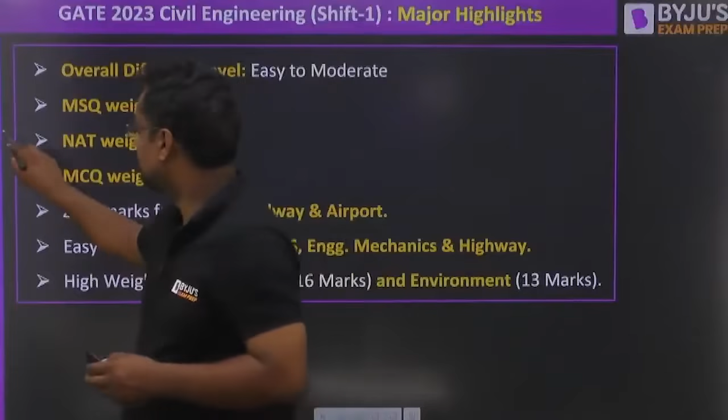If I tell you about the highlight of this GATE forenoon paper, the paper was easy to moderate level. The total number of MSQ questions were 9, NAT questions were 22 and MCQ questions were 34. There were no questions from PERT CPM, railway and airport. Even the weightage of fluid mechanics was not as high as expected, and particularly from steel, engineering mechanics and strength of material also, the questions were easy.

As usual, again the highest weightage was from geotechnical engineering with 16 marks and environmental engineering with 13 marks. If I tell you about the individual subjects: mathematics as expected was 13 marks, strength of material again 5 marks, hydrology 5 marks, engineering mechanics 2 marks, geotechnical was again the highest at 16 marks, surveying 4, building material 1, no question from PERT CPM, steel structure was 3 marks, irrigation was 1, highway engineering 6 marks, open channel flow was 5 marks, environmental 13, fluid mechanics 2.

You can see that fluid mechanics, a high weightage subject with vast syllabus, was coming at just 2 marks, and the very small topic of open channel flow was 5 marks. Aptitude was fixed at 15 marks, and concrete structures was 4 marks.

If I compare these subjects with the previous years, mathematics will of course be 13 marks. There is not a considerable difference in each subject with respect to previous years. Geotechnical was highest, and it was always highest. But if we see the fluid mechanics part, it was very less in both shifts this year, whereas in previous years it was 4 to 5 marks, but this year it was 2 and 0 in the respective shifts.

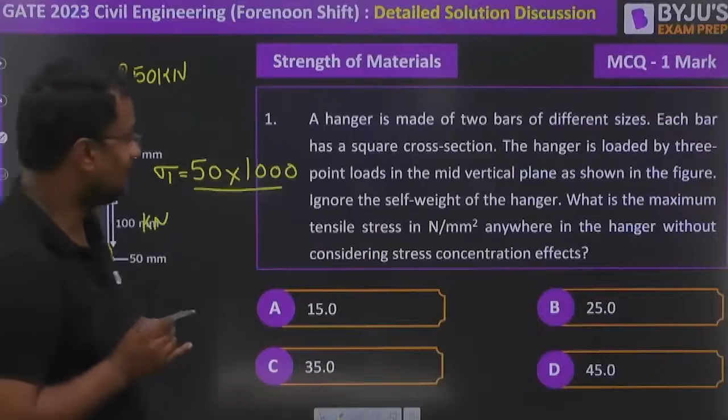First, let me find out the stress in bar 1. Sigma 1 will be the force, which here is 50 kilonewton, converted to Newton since it's asked in Newton per mm square. The cross section area: each bar has a square cross section of 50 mm, so 50 into 50. So sigma 1 will be 20 Newton per mm square.

Now let me go to bar 2. Stress in bar 2, if you see from above it is 250, from below also it will be 250 kilonewton, which in Newton is 250 into 1000, and area will be 100 into 100. If you solve this, the value you get is 25 Newton per mm square. So in bar 2 it is 25 throughout, because it is weightless and the area is the same. In bar 1, the stress throughout is 20. So the maximum is 25 Newton per mm square.

Very easy, and most of the students have done it.

And the students who will be giving the examination in future will also be able to do such questions very easily. Now, let me consider question 2.

It was an MSQ, asked for 2 marks. Although it was MSQ, it was asked in 2 marks, but I again consider this an easy level question.

Now, here the beam is given with 2 moments. These are not torques, these are moments. One moment was anti-clockwise, one moment was clockwise, and it is asked that if the support reactions are 0. If I consider this as A and B, RA and RB, this is RA and that is RB, so summation of Fy has to be 0 to be in equilibrium, so RA plus RB equals 0.

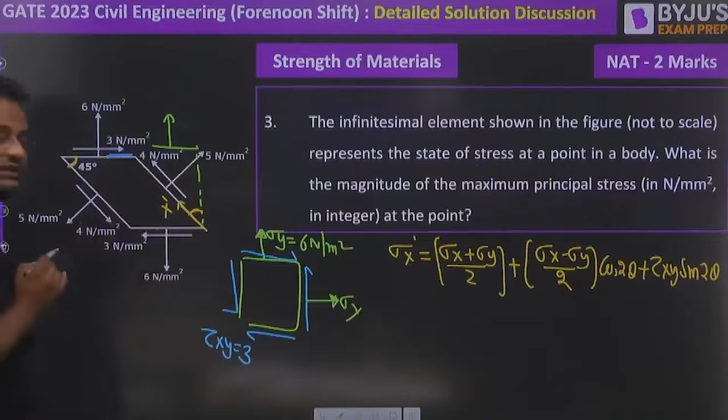Now, we all know that sigma x-dash equals sigma x plus sigma y by 2, plus sigma x minus sigma y by 2 cos 2theta, plus tau xy sin 2theta. And theta here is 45 degrees because this is 45, so these two lines are parallel, so again if these two lines are parallel and this is 45 degrees, so of course from the parallel line concept, this is again 45 degrees.

These two lines are parallel, so this is like this, this is 45, so this is 45. This angle will again be 45 degrees, and this whole angle is 180. So if you simplify this, if I draw a perpendicular from it, so this will be 45, and again by vertically opposite angle, it will be 45 anyhow, from either way you can go.

Now at 45 degrees, cos 90 will be 0. Sigma x-dash at the 45 degree plane, what is the stress? It is 5. So sigma x plus sigma y, you already know sigma y, sigma x you have to find out, sigma y is 6, by 2, cos 90 will be 0, and sin 90, sin 45 into sin 90, sin 90 is 1, and tau xy is 3.

Tau xy here you are getting as 3. Can you let me know what option you get as sigma x here? What is the sigma x you got? Please let me know, everybody, in the comment section.

So here if you multiply this by 2, so this is 10, this is sigma x plus 6 plus 6. So from here sigma x value you got as minus 2, in Newton per mm square.

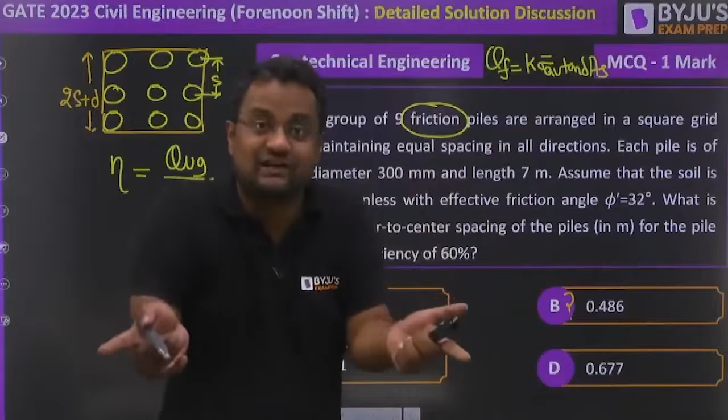So QF is given by K into sigma average into tan delta into A surface. Once students think this is the formula, the K and delta values depend on the type of material — loose sand or dense sand — but the type of material is not given here. So they think they have to use a different formula, the Converse-Labarre formula, which I'll also tell you. From both approaches, students get different answers, and moreover both options are present in the given options — that is why students are very ambiguous in this question.

Now let me tell you that efficiency is 60%, I guess, yes, 0.6. Now group capacity is K into sigma average. So at the top, the stress will be 0, at the bottom it will be gamma L, so it will be gamma L by 2.

K sigma average, tan delta into A surface. So this is a pile, and surface area, this is in 3D, na? So 2S plus D into L, 2S plus D into L, and 4 such surfaces upon N, 9 into Q of single pile.

So K sigma average will be again gamma L by 2 tan delta into A surface. What is A surface of a single pile? Pi into D into L. And eventually, the K and delta are not required because they will be cancelling out. Even the other terms also, gamma and L, other terms also.

So here, the only thing that is unknown is spacing. The unknown thing here is spacing, because diameter is also known, L is also known, and K and delta are cancelling, and from here you will be getting answer as 0.486, and IIT has given only the answer 0.486 for this particular question.

What many of the students have done for the same question, let me tell you, let me erase this. What they have done, they have used a Converse-Labarre formula, and that formula is M into n minus 1, M into n minus 1 plus n into m minus 1, by m into n. Of course, m are the number of rows and n is the number of columns. Both are 3 and 3 because there are 9 piles.

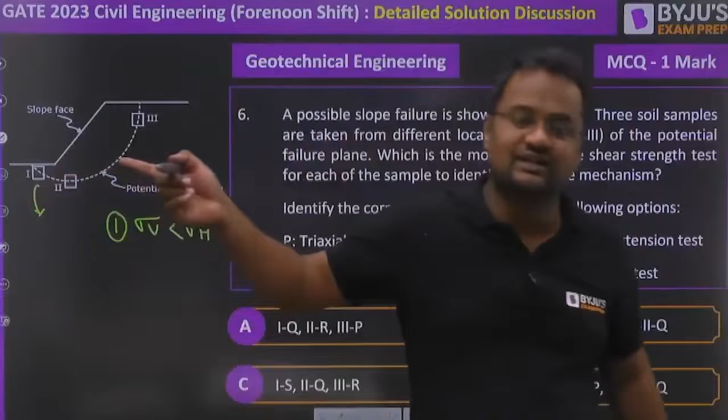Guys, for a single soil, C and phi can be different for different testing. If you take a soil from your backyard, you do the dry direct shear test, it can give different values of C and phi. If you do triaxial CD test, it can give different values. For the same soil, if you do the triaxial unconfined test, it will give different results. If you do the triaxial UU test, it will give different results. So for the same soil, it will give different results.

So that test should be done that is simulating the field conditions. Okay, so here when sigma h is more compared to sigma v, the extension test gives the actual or similar results. Here the failure plane is perpendicular to that, and in direct shear box test, the mold is like that, the failure is also like this.

So here direct shear test is better for the second. And in third, guys, when this is the failure plane, then the better test is triaxial compression test. So third it will be P. So the better option will be A. Okay, yes, but I believe that a student might not be able to solve such questions directly if he has not done this earlier.

Now let us go to question number 7. It was asked in NAT for 1 mark and everybody can do this. What is this question? In this particular question, they are asking the phi value. Drained direct shear test was conducted on sandy soil.

So we know that tau is equal to C plus sigma tan phi. As it is sandy soil, C will be 0. What is the shear stress? Under a normal stress of 50, shear stress was 35. So 35 equals 50 tan phi. One equation, one unknown, everybody can find this. From here, the phi value, I have already calculated so time is not wasted in calculations, is 35 degrees.

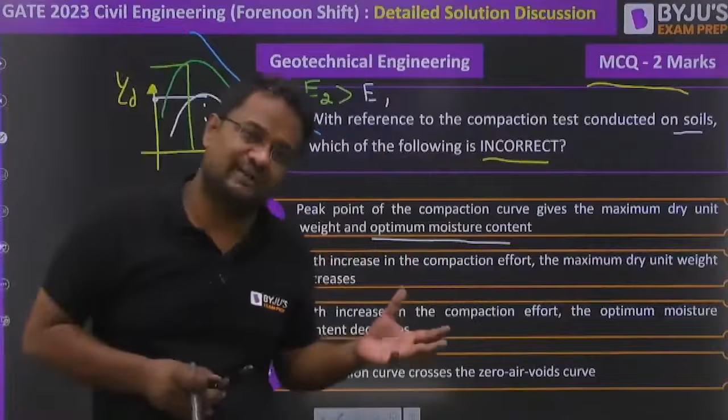Now this is the zero air void line, and practically, however much you compact, even if you are Rajanikanth or a bodybuilder, out of the millions of voids, you will not be able to make it zero air void. Practically, only theoretically do we consider zero air voids. So the compaction curve will never cross the zero air void line. So the right answer here was D.

Now let me go to question number 9. You can consider it a soil question also, but only the mathematics will be required here.

It is saying that due to a point load P at ground level, at a particular point which is Z below and R distance away, the stress due to Boussinesq, the vertical stress, is 3P by 2 pi into Z cube upon R square plus Z square, to the power 5 by 2. And they are simply asking, R is the radial distance, Z is the depth, and the variation is given like this.

Then the value of sigma Z will be maximum under what condition? So of course for any function, for maximum you will be doing d(sigma Z)/dz or dr equal to 0. They are asking what is the locus of maximum sigma Z. So you have to differentiate.

You have to differentiate to make it maximum. For it to be maximum, the derivative will be 0. Once you differentiate—I am not going into the full calculation, you can all do this—3P by 2 pi is constant, only differentiating the rest by the quotient rule, you will get the expression as 3r square equals 2z square.

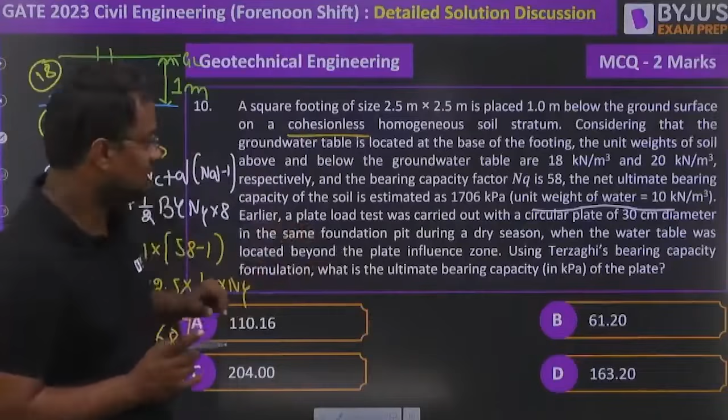So here Q and U is given as 1706. From this expression, the N gamma value you are getting as 68. Now, with this N gamma, you have to find out the ultimate bearing capacity of a plate.

Now, what is happening? A plate load test was carried out with a circular plate. The shape modification factor has to be applied accordingly. Of 30 centimeter dia, and it is same foundation. When the water table was located very below, now there is no water table, it is not in the influence zone. Using Terzaghi bearing capacity formula, what is the ultimate bearing capacity? Now it is asking QU.

So CNC, the first term will be 0. 1.3 CNC, that first term will be 0. Then it is Q into NQ. In the second term, there is no modification factor. And for the third term, it is 0.3, since it is circular. 0.3 B gamma into N gamma. I hope everybody is fine with this.

Now, QU we have to find out. Q is the load. And in the plate load test, guys, when the plate is acting here, there is no load, there is no soil above. So, second term will also be 0 here. I hope everybody is getting this.

Third term will be 0.3. B is the diameter in this case, that is B. Gamma is, this is the third term. So, this soil, and there is no water now. So, 0.3 into 0.3 into gamma into N gamma. Gamma will be 20 or 18 here in this term.

Guys, I hope you got it till here. That is 1.3 CNC, so this will be 0. Q and Q, there is no load above, no surcharge load, so it is 0.

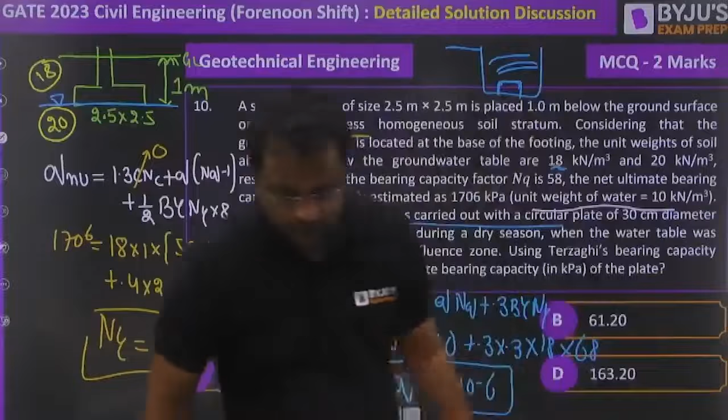From here the QU value you are getting as 110.16. That is option number A. I hope everybody got this.

Okay, now moving further, this was geotechnical, question 11. So again, guys, you have to apply the simple formula of factor of safety. And it is asked for the failure plane, so factor of safety will be 1.

As we have derived many times in the class, factor of safety is equal to C plus gamma T into Z into cos square beta into tan phi, upon gamma T Z cos beta into sin beta, and factor of safety you have to put as 1 because they want the failure. Phi is 25 and beta, C is this, inclination is 35. So this is one equation, one unknown, everybody can find this, and the value of the depth was 5.03.

Value was 5.03, and let me tell you the range given by IIT Kanpur for this question because it includes some complex terms: 4.8 to 5.2.

So easily, if you are doing it correct, you will be in the range. Okay, now 12th question, again an easy one.

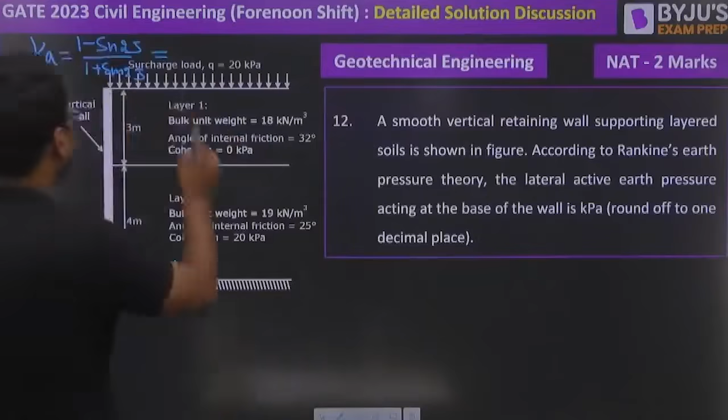Now what is the horizontal stress at the base? That is Ka into sigma V minus 2C root Ka. Since we are finding at the base, we apply Ka accordingly. So Ka is 0.406. Vertical stress here will be 20 plus 18 into 3, that is 54, plus 19 into 4, minus 2C. What is C here? C is 20, and root 0.406. I hope you can easily get this in 1 mark also.

So from here, the value you are getting, 2 into this C is how much? 40 or 20? C here is 20. So from this value, sigma horizontal you will be getting as 35.4 kilonewton per meter square.

This is a NAT type problem. Let me check the range also. So the range was 34 to 37. So it's enough. 34 to 37 is the range given by IIT. If your concepts are correct, you will always be in this range, the range given by IIT Kanpur.

Now let me go to the 13th question. Yes, now you will find some tricky question here. I expect some of you might not be able to do this. A vertical trench is excavated here.

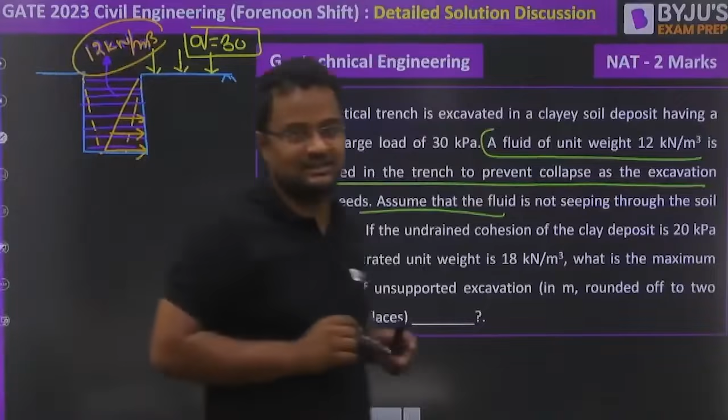How is this helping? Because now the stresses due to this are like this, more stress at the bottom, and here also more stress at the bottom, so they will be counteracting each other. From soil there is more stress here, and water is also applying stress here, so they are counteracting, and it will not be able to collapse easily now.

Now the phi value is not given. What is the maximum depth of unsupported excavation so that it is not failing? The value of saturated unit weight is 18 and the undrained cohesion value is 20. Surcharge load was 30, and the unsupported length is asked. And it is clay, yes.

So phi will be 0 and Ka will be 1. Now sigma H is equal to Ka into sigma V minus 2C root Ka as usual. Now due to the fluid, there will also be a stress in the opposite direction, so it will be plus gamma Z, that is 12 into Z, where Z I am counting from here. I hope everybody gets this expression: sigma H is equal to Ka into sigma V minus 2C root Ka, minus gamma Z, since this is also in minus.

This is also in minus. Why this minus? Because we assume this in plus direction. This horizontal stress is in plus direction, so this will be minus. So it will be minus 12 into Z. Z is the depth.

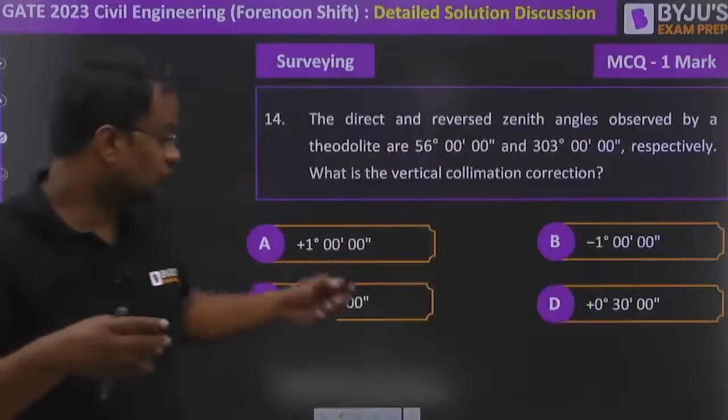Now 14th question, up to here the questions were soil mechanics. As far as soil mechanics is considered, the two fluid questions, many students might not have clicked this concept, that you have to apply minus 12z here. This might not have been clicked in the examination, and also the failure plane concept, which test was there - direct shear, extension test or compression test. Apart from that everything is smooth. That is why nobody got 100 out of 100 till now. Maybe some students will get it in the future and will be very happy.

More than 75 marks, guys, your rank is under 300 range. More than 65 marks you will be getting an IIT. More than 76, 77 marks this time, because the number of PSUs are more, you will be getting PSU also.

See, if both the angles, correction is applied 30 minutes, so this will be 56 degree 30 minutes, and this will be 303 degree 30 minutes. Now if you plus them, 303 plus 56 is 359, and 30 and 30 is 360. If you plus them, it will be 360. Then it is exactly matching with the values.

So then the value will be 360 by 2 minus the 180 value, it will be 0. So after correcting it by plus 30, making both angles 30 more, this 30 more, this 30 more, then averaging it, then it will be having no error. By doing the plus 30, adding them, dividing by 2, you will be getting 0.

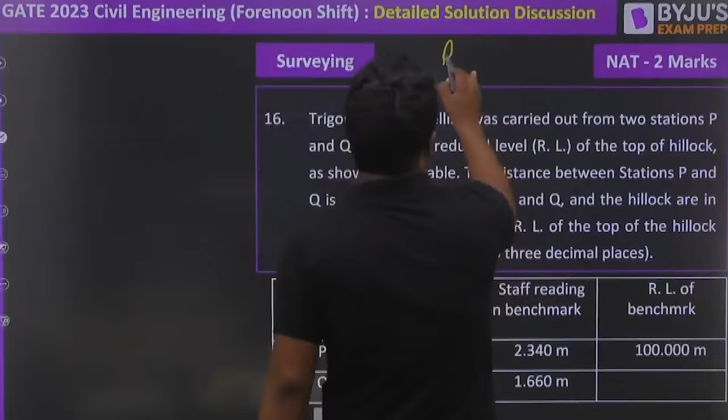Range given was 137.5 to 137.7. This was the last question, as per the master question. So what is happening here is that trigonometric leveling was stationed at P and Q to find the reduced level of the top of a hillock. This is a hillock and we have to find the top elevation.

Distance from P and Q is 55. So here is somewhere P, here is somewhere Q, and the distance between them is 55. Let this distance be D. And here was a benchmark, and benchmark elevation was 100.000. Benchmark - where is the benchmark? The distance from P and Q is this.

The trigonometric leveling was carried out at two stations P and Q, to find the reduced level of the top of a hillock as shown in the table. The distance between P and Q is 55. Stations P and Q on the hillock are in the same vertical plane. The RL of the top of the hillock has to be found out, and the benchmark - this is the staff.

From station P, the angle is 18 degree 45 minute. So this must be P here. This must be P here and this must be Q here. So from P, the angle is 18 degree 45 minute. P will be higher because the value is 2.340.

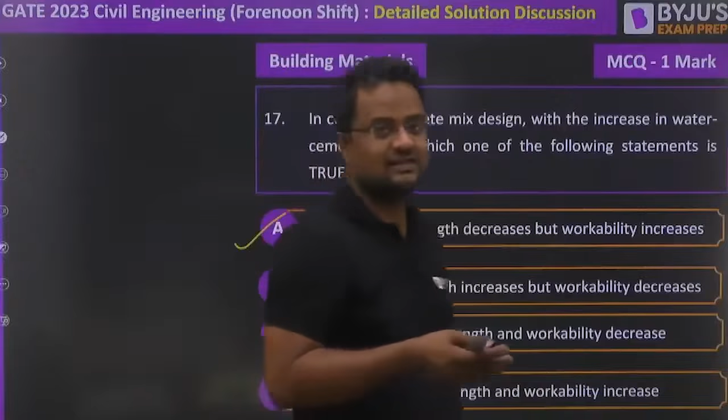Now I hand over the stage to Richa ma'am. Thank you. Hello everyone. So thank you Abhinav sir, and we'll be continuing further regarding the forenoon session analysis for my subjects.

So let's be quick. I guess you have already known the weightage part, but if you haven't, let's have a quick glance at it.

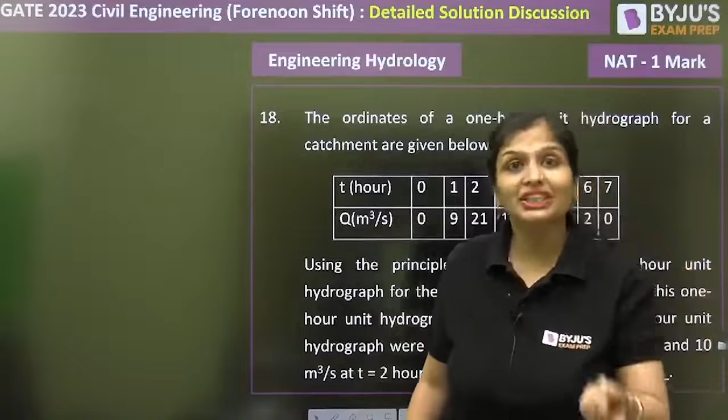So the ordinates of the D hour unit hydrograph was obtained, and it is told that you have to lag it, do it whatsoever you want, but it has told you the condition that when time will be 1 hour, the ordinate will be 3 meter cube per second, and when time will be 2 hours, the ordinate will be 10 meter cube per second. Now you do your permutation combinations, but calculate and tell us. So now we'll also try to do this.

Okay, so I'm doing it freehand now, using a blue-black color pen. Time on one side and then the ordinate. Let me go back first. Time varies from 0 to 7.

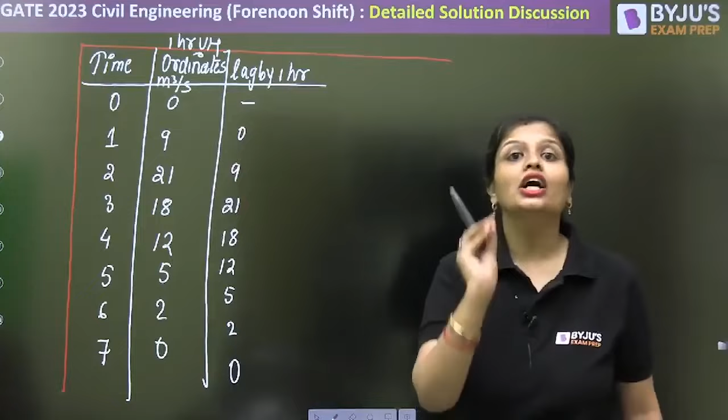Check it out at what durations it has told you - at 1 hour and 2 hour. Check whether you are getting the respective ordinates or not. If you are not, you have to lag it again. So I'll write lag by another 1 hour. So, lagged by 1 hour, then again lagged by 1 hour.

So if you add all these 3, you will be getting the 3 hour direct runoff hydrograph with n value as 3 centimeter. So you don't have to do addition for all - what is required at 1 hour and at 2 hours, do that only. So at 1 hour it will be 9 and at 2 hours it will be 30.

But in the question it is asking me D hour unit hydrograph, so instead of DRH, I want unit hydrograph. So what I'll do is 3 hour unit hydrograph will be 3 hour DRH divided by 3. So 9 divided by 3 will be 3 meter cube per second and 30 divided by 3 will be 10 meter cube per second. So I'm getting the values correct - 3 meter cube per second at 1 hour and 10 meter cube per second at 2 hours.

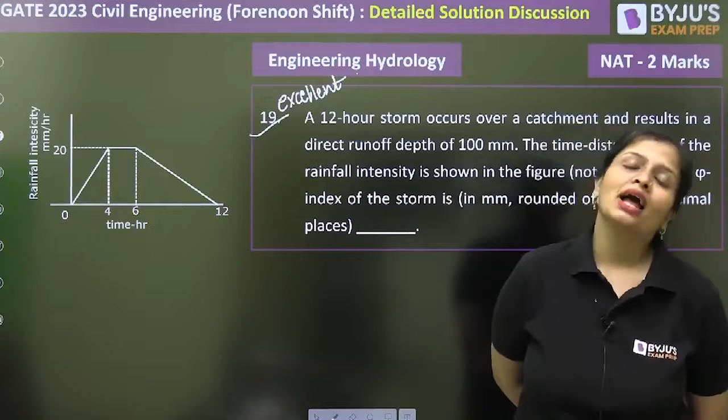Students have reported, I was confused when this paper came. Some people were saying W index was asked, some were saying phi index was asked. So I calculated just W index at that time. And you know what, in this question, phi index was asked. If phi index is asked, many students reported the value of W index as phi index only, which was wrong.

Now, obviously, whenever such questions come in the form of a flowchart and it is asking you phi index, first you have to calculate W index. That's obvious. So first we'll be calculating W index. But for calculating W index, what do you know?

W index is equal to average infiltration rate over the entire storm period. So this will be P minus R by T.

Now what is given to us? Anything given in the question? Runoff depth is given as 100 mm. Time is given as 12 hours. Precipitation you have to calculate because the graph of rainfall intensity and time is given. So we'll calculate the precipitation.

What it will be? Half sum of parallel sides. Sum of parallel sides, this is 12, and this one will be 6 minus 4, that is 2. Into distance between them is 20. So how much will it become? From here, 140 mm.

So this will become how much? 140 minus 100, that is 40 divided by 12. This will come out to be 3.33 mm per hour. So this will be somewhat here. This will be the W index.

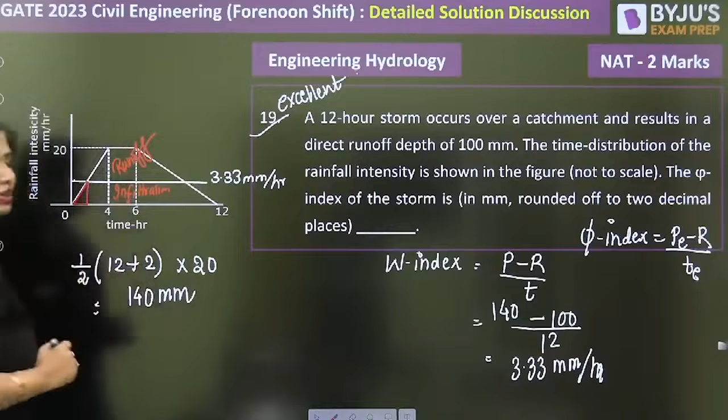Okay, this portion is taken by W index, but this portion is not taken out. I have to subtract that also. This portion is not taken out. So firstly, I have to know the time.

So we'll apply the similar triangle concept. This portion, I'll be applying similar triangle for this one: 20 by 4 is equal to 3.33, because here the value is 3.33 T1. So from here I will get T1. How much are we getting T1? This will come out to be 0.66, or you can take it as 0.67.

Similarly, I want to calculate T2, so again I will apply similar triangles here. 20 by 6 is equal to 3.33 by T2. So again, into 6 divided by 20. Correct? Anything we have done wrong or what? Just check it out: where 20, this triangle, this is the triangle, 6 is equal to 3.33 divided by T2. So just calculate.

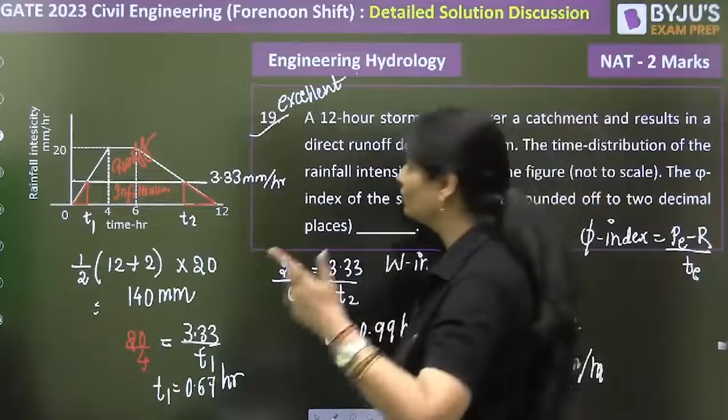P, that precipitation which produces runoff. This is the precipitation which is producing runoff. This top portion is the runoff. This is infiltration. This and this were also included in W index, but this will not be included in the case of phi index, you have to subtract it. So moving next, we have to calculate PE, that precipitation. Total precipitation was how much? 140 mm. So you have to subtract these two.

Half base into height. Base is 0.67 into 3.33. And again this one is how much? Half, you will be getting how much? 0.99. Okay, but in this case, will you be taking 0.99 only?

Tell me, that is again a question. Will you be taking 0.9? Tell me fast, by the time I'll do the calculation with my virtual calculator mobile. Will you be taking 0.99 only? Of course. Why? Why will you be taking 0.99? Because this whole portion is 0.99. I'm telling you all the mistakes.

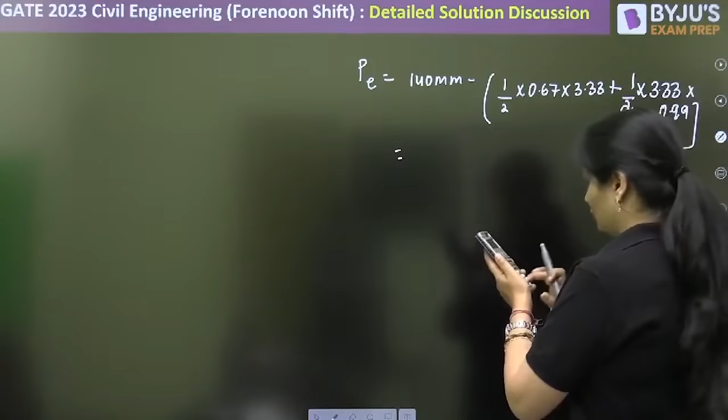Clear? So let's solve it. 140 minus, here it will be half into 0.67 into 3.33, half into 3.33 into 0.99. Okay, so it will come out to be 137.2361. This will be the precipitation.

So now apply the phi index. Phi index is that precipitation which produces runoff. So this is 137.2361 minus, what was the runoff? It was 100 mm. Now let me check it out again.

So that to avoid 100 mm, and the duration of rainfall excess is 12 hours. So in 12 hours you have to subtract how much? 0.67 hour and 0.99. So this will give you the phi index in mm per hour. That's it. So let's solve this. Minus 100. Okay, so this will come out to be 3.6 mm per hour, 3.6011 it is coming, so this will be the answer.

Good question. Since I was explaining, it is taking time, but otherwise this question is very simple. Okay, so come on, now moving to the next question without wasting time.

Oh, this question was damn easy. Simple formula based question, nothing you have to do. What is given to you? In Horton's equation fitted to the infiltration data, what is given to you? Initial infiltration capacity, which is always more, is given to you as 10 mm per hour. So initial, F naught is given to you as 10 mm per hour, or you can write it as Fi, whatsoever denotation you take, that's up to you.

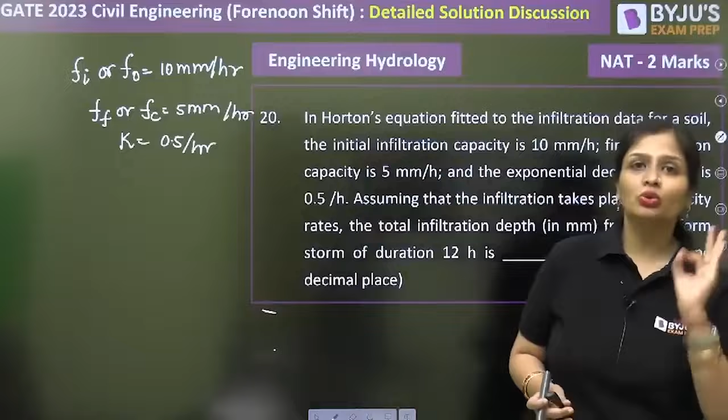And final infiltration rate is 5 mm per hour. So final, that is FF, or you can take it as FC, is 5 mm per hour, and exponential decay constant K is given to you as 0.5 per hour. Just check it out, this is important. Sometimes they write it in per minute, per day, so you have to have a check on it. Now, assuming that infiltration takes place at capacity rates, you know that you can apply Horton's equation only in the case where intensity of rainfall is greater than or equal to infiltration capacity. The total infiltration depth for a duration of 12 hours will be.

So since it is asking you cumulative, what you have to do? You have to integrate. So in one line, we'll do it, integral from 0 to 12 of FC plus F naught minus FC e to the power minus KT. So what is FC? FC is how much? This is 5. 10 minus 5 is 5, e to the power minus 0.5t.

So this will be 5. Integration of dt will be t, from 0 to 12, plus 5, from 0 to 12. So that's it. 5 into 12 minus 0, come on, 12 fives will become 60. 12 fives are 60. We have to calculate this: 5 divided by minus 0.5, e to the power minus 0.5 into 12.

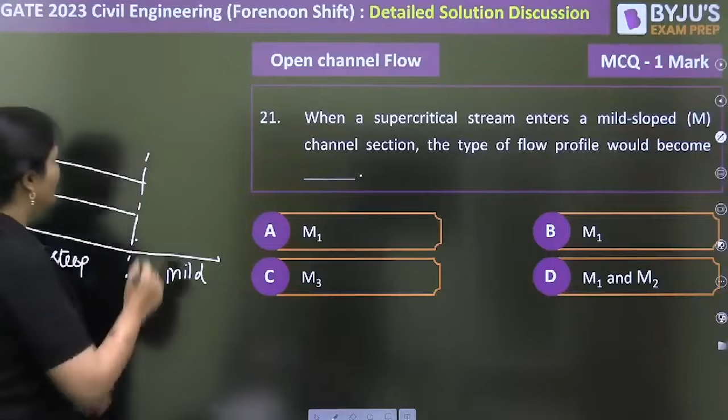Instead of this, you can have a sluice gate also. So you can see the water flows, and here it will form an M3 flow profile. And after that, well in advance, it forms a hydraulic jump as well. So that's the condition, because here hydraulic jump is not given to you. But when it goes from the steep slope, from the S3 flow profile, and it goes towards mild slope channel, you know that initially there is a small rapidly varied flow condition, and then you get M3 flow profile. So M3 will be the correct answer.

Okay, next question. This question, I won't do the calculations. This is purely based on logic, and within 2 minutes at max you will get the answer. How? I'll tell you. These are given just like a trap so that you have to do calculations which is not at all required. How come? Let's check it out.

Now, while making the flow profile, the first rule which is told to you is: lesser the slope, more will be the normal depth, and vice versa. So if the slope is less, depth will be more. And you can check it out by yourself, common sense. If this is the slope, more depth will be there. If I increase the slope, lesser depth will be there above it.

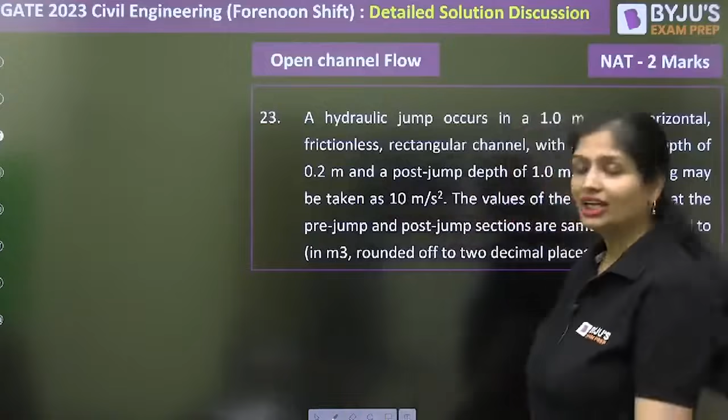1 meter wide horizontal frictionless rectangular channel. Whenever this phrase, horizontal frictionless rectangular channel, is given, that means you can apply Bélanger's momentum equation. So this is given to you.

Pre-jump depth, that is supercritical depth, is given as 0.2 meter, and post-jump depth is given as 1 meter. G value is given as 10 meter per second square. It is told that the value of specific force at pre-jump and post-jump sections are same, so calculate the specific force, denoted by F. Since this is an NAT question, make sure you take the value of G as 10 meter per second square only.

Now for calculating F, what is specific force? You can write it as A Z bar plus Q square by GA, where Z bar is the centroid from the free surface. For a rectangular channel section, first I have to know the discharge. Width is given, depth is given, everything is given except the discharge.

So for calculating discharge, you should know Bélanger's momentum equation. From that we got a result involving Y1 and Y2, Y1 plus Y2. Everything is given to me: 0.2 into 1.

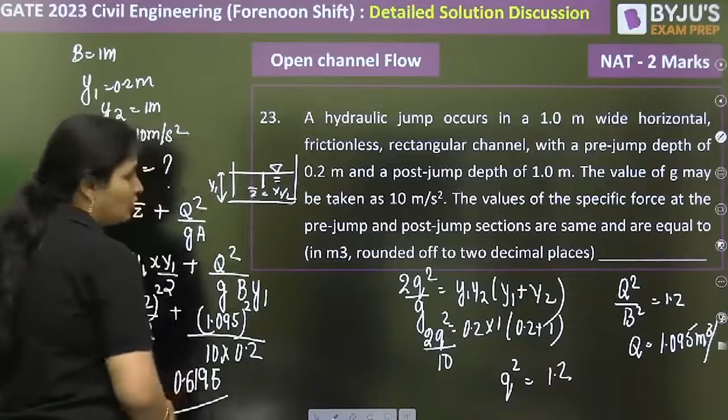0.2 square by 2 plus Q square, which is 1.095 square, G is 10, width is again 1, this is 0.2. Come on, calculate: 0.2 square divided by 2 plus 1.095 square over 10 into 0.2. How much will it be coming? It will be coming 0.6195. This will be the specific force. You can round it off up to 2 decimal places, so you can take it as 0.62. This will be the answer. Okay, simple question, just calculations are there.

So now what happens? The greenhouse gases which are there, the solar wavelength which is coming, greenhouse gases are present, trapped in the atmosphere. So now what will happen, what will greenhouse gas do? The solar radiation which is there, I'll draw the sun also, so don't laugh, I draw it like this only ever since my childhood.

So what will happen? These solar radiations are there, so greenhouse gases which are dispersed in the atmosphere, what will it do? It will allow the solar radiation. So everywhere you will see it allows, it doesn't absorb, it allows firstly. So it allows the solar radiations, but the wavelength is short. If you talk about the size, the wavelength is short, so short wavelength solar radiation is there. The greenhouse gas will allow the short wavelength to pass through the atmosphere.

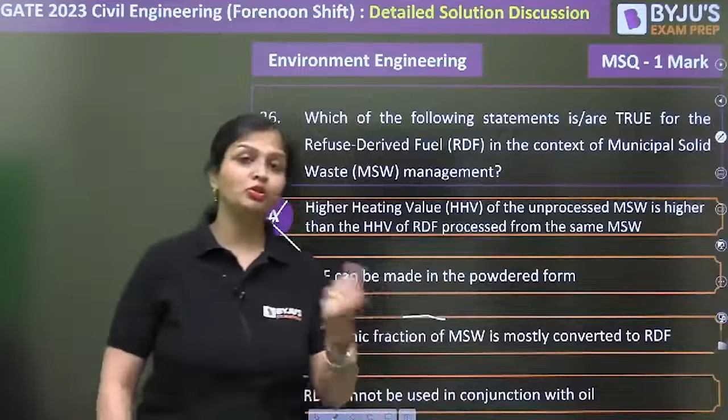RDF cannot be used in conjunction with oil - this is something where there's slight ambiguity. In some research papers they say it can be used in conjunction with oil, and somewhere it is said that it cannot be used. The reason it's said it cannot be used could be that oil is there specifically during the rainy season - the refuse and oil mixture can be there, so there are chances they can be used. So the word 'cannot' is incorrect here, it can be used. So B will be the answer for this. Okay, next coming further.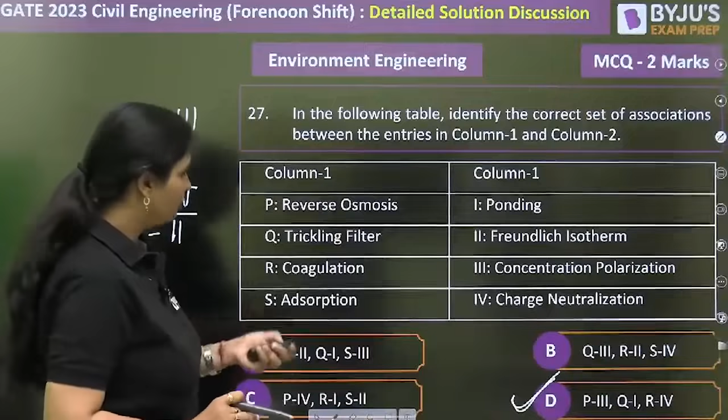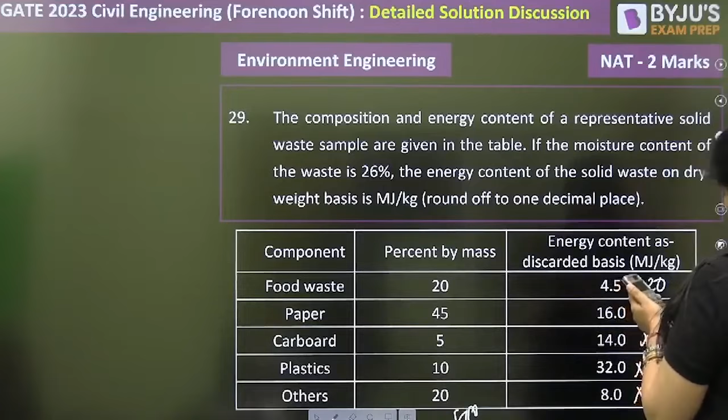I have to calculate the energy content on dry basis. So if for 1 kg, 4.5 is the energy content, for 20 kg how much will it be? I'm doing it this way: 4.5 into 20... 45, 5, 10, 20. So I'll calculate it. Total value comes out to be 1360 megajoules.

Now it is asking me the energy content on dry weight basis. So the total energy is 1360 divided by (100 minus moisture content). Moisture content is 26%, that's it. So let us solve it: 1360 divided by (100 minus 26). So this will come out to be... 18.37 megajoules per kg.

Clear? So this was the simple question which can be asked, we have dealt with these questions. Now coming further to the next question - this was flocculator, a very basic question, trust me.

A flocculator tank has a volume given in the question. Temperature of the tank is 15 degrees Celsius, velocity gradient given is 100 per second. Temperature of the water in the flocculator chamber is reduced from 15 degrees Celsius to 5 degrees Celsius, and all other operating conditions, power input, everything maintained is same.

So now the decrease in the average velocity gradient, meaning G - initially, let us suppose when it was 15 degrees Celsius, the velocity gradient was G1. Now if the temperature is reduced to 5 degrees Celsius, velocity gradient is G2. How much reduction has taken place? That's what it's asking. Dynamic viscosity is given to you, meaning mu is given to you, and you have to tell the percentage decrease.

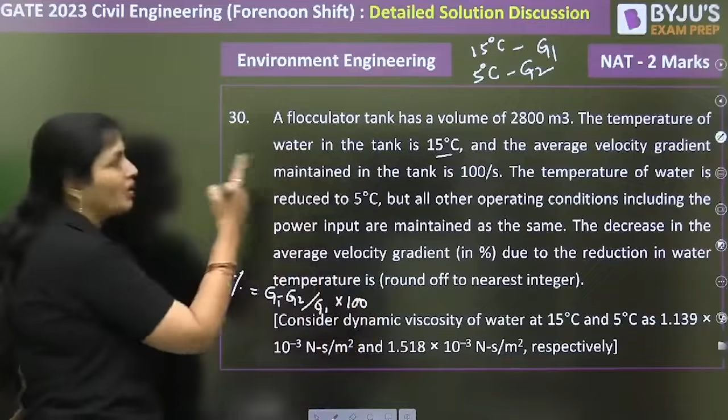So firstly, G1 I already know. For getting the percentage decrease, it will be G1 minus G2 divided by G1 into 100. So G1 I already know, I have to calculate G2. Firstly, I know that power is same, so P is equal to G square mu V. So power - we have to calculate. G is given to you as how much? 100.

100 square. Viscosity is inversely dependent upon temperature. Dynamic viscosity at 15 degrees Celsius is given to me as 1.139 into 10 raised to power minus 3. And volume is given to me as how much? Volume is 2800.

So let's calculate this: 100 squared into 1.139 into 10 raised to power minus 3, into 2800. So 31892 watt is the power, and power remains the same. So again applying the same formula for calculating.

This was G1, now I have to calculate G2. 31892, temporal velocity gradient I have to calculate. Viscosity is given as 1.518 into 10 raised to power minus 3. Volume is again the same, that is 2800. So from here we will calculate G2.

How much will it come? 31892 divided by... raised to power minus 3. 86.62 seconds. Initially it was how much? 100 second inverse, now it is 86.62. So percentage decrease will be 100 minus 86.62 divided by 100. 13.38% is the percentage decrease.

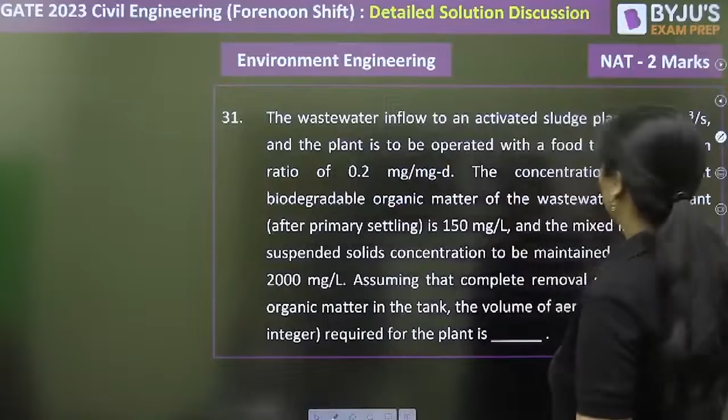So what you can see, wastewater inflow is given to us as 0.5 meter cube per second. Food to microorganisms ratio is given as 0.2. Now in the question it has given influent BOD, S0 value is given as 150 mg per liter, and mixed liquor volatile suspended solids, that is X value, is given as 2000 mg per liter.

Complete removal is taking place, so it is asking us the volume of aeration tank. Simple, F by M, food by microorganisms. Food is organic matter, microorganisms you report in terms of suspended solids, V into X. Q is 0.5. Just check it out, here the unit is in day. I always say write the units corresponding to it, you will never make a mistake.

So 0.5, S0 is 150, so this is meter cube per second, and here it is mg per liter. Volume is coming, that we have to calculate in meter cube, and X is 2000 mg per liter. So calculate the volume from here. This will be 0.2, and this we have to convert into seconds.

So this will be 0.2 divided by 86400, so this will come out to be 2.3148 into 10 raised to power minus 6, if I am converting it into second inverse, food to microorganisms ratio. So into 2000.

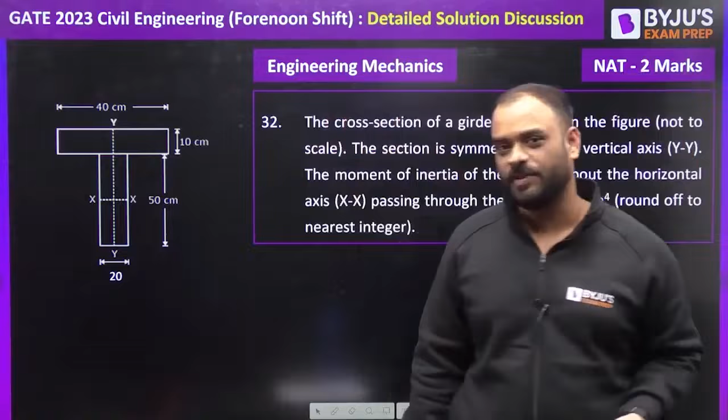Okay, so let's understand this particular problem which is based upon the moment of inertia. No doubt this question is very simple but little bit calculative one. So let's understand how we can solve this. Okay, so what is given to us? The cross section of a girder.

Now the cross section of a girder is shown in the figure, not to scale. The section is symmetric about a vertical axis YY. The moment of inertia of the section about the horizontal axis XX passing through the centroid is in centimeter raised to power 4, which we have to find.

That means we need to find out the moment of inertia about XX, about this particular axis. So first we will try to find out the centroid of this section from the bottom. Let us consider this as the y bar value. Now let's calculate the area.

This is basically area 1 and this one is area 2. Area 1 is equal to 20 into 50, that is equal to 1000 centimeter square. Then we have area 2 which is equal to 10 into 40, which is equal to 400 centimeter square.

Now guys, what should be the location of the centroid of these areas from the bottom? Let's find it out. Let us suppose the centroid of this particular area is at this location, and at this particular location for area 2.

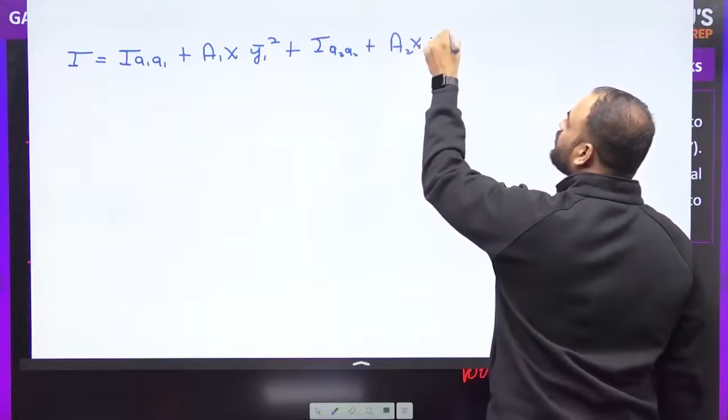So A1 into y1 bar square plus I A2 plus A2 into y2 bar square, right? So y2 bar square. Okay, let's calculate this particular value.

How much area did we have? What will A1 be? This will be 20 into 50 cube divided by 12, right? Let me show you that figure first. So this is 20, this is 50, BD cube by 12, okay? BD cube by 12 plus area 20 into 50 multiplied by this distance y1 bar.

So y1 bar is equal to how much? This particular distance is y bar minus y1, which will be y1 bar, right? That means we need to subtract 25 from 33.57, right?

33.57 minus 25 square, then plus moment of inertia about A2. So how much is it? It will be 40 into 10 cube divided by 12 plus 40 into 10 into, again the distance of the centroid from the bottom for area 2, which is 55, right? So 55 minus y bar.

Wait a second guys, let me check once again. Yes, wait a minute. This is basically 55 and this one is y bar, right? So you will get this particular distance, right? 55 minus y bar value. Okay, you can calculate it.

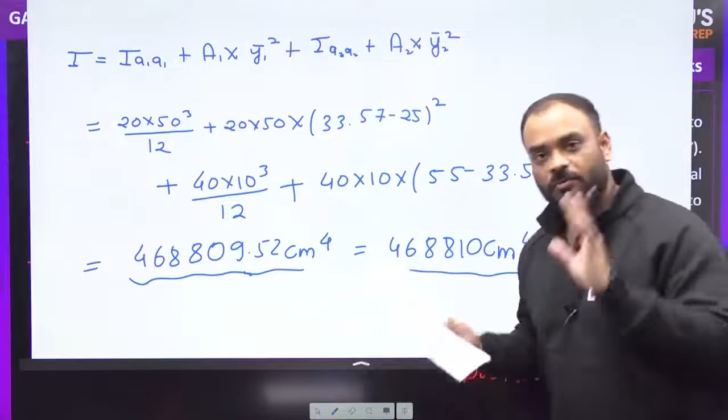Now I think all of you are able to understand it is a very simple question, which is based upon engineering mechanics. Let's move to the next question, which was asked in your examination.

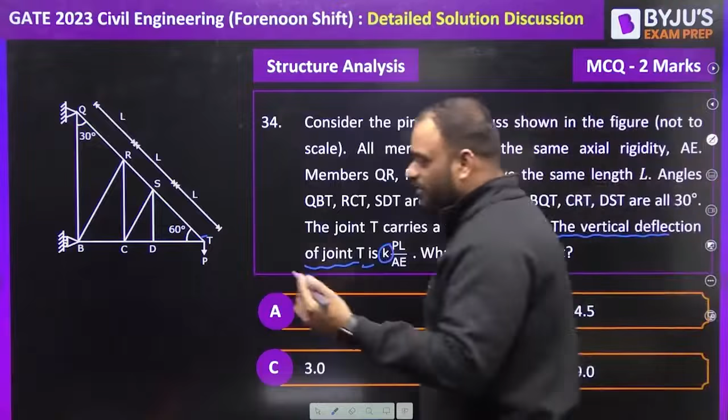So first of all, it is very basic. You know, guys, we can remove some of the members because these members will have zero force. Let me remove it. So this one is zero force member, this one is zero force member, this one is zero force member, and this one is also zero force member. You know the properties right? When 3 members meet at a particular joint, 2 are collinear, 1 is non-collinear, make it 0 like this. Now we have a simplified truss.

Let's draw it on the next page and then we will try to find out the answer. So let me draw the figure, guys.

So this is our simplified truss in which at this particular point we have P and this is our point T. Then we have a roller over here, so due to that reason we will have a horizontal reaction which is basically HB. And at this location we have HQ, and this one is VQ. This length is 3L, and this angle is already given to us.

Let's see if it is given or not. Yes, it is 60 degrees. So guys, if it is 60 degrees, then we can write down the length of BT. The length of BT is equal to how much? This is HB. The length of BT is 3L cos 60 and the vertical length will be 3L sin 60. This will become correct, right?

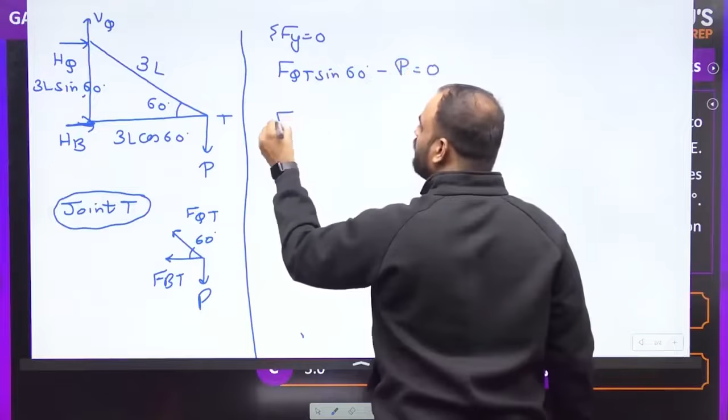So summation Fy is equal to 0, that means FQT sin 60 minus P is equal to 0. So FQT multiply by root 3 by 2 is equal to P. So the value of FQT is equal to 2P by root 3. So this is the value which we are getting for FQT.

Please remember this. Now next we have to find out the FBT value. How we can do it? By considering summation Fx is equal to 0. That means minus FBT minus FQT cos 60 degree is equal to 0. So let's write down FBT value. FBT is equal to how much? It is minus of FQT cos 60.

So FQT is equal to 2P by root 3, multiply by cos 60. Cos 60 is 1 by 2. Kindly cancel this, you will get minus P by root 3 as a value.

Okay, now the next member which we need to find out is the BQ member. So let us consider joint B. So guys, at joint B we have this particular member, which is a vertical member, and this vertical member is BQ, so FBQ, and we have one horizontal reaction, but the value of this reaction we don't know. So this is basically HB, and then we have FBT.

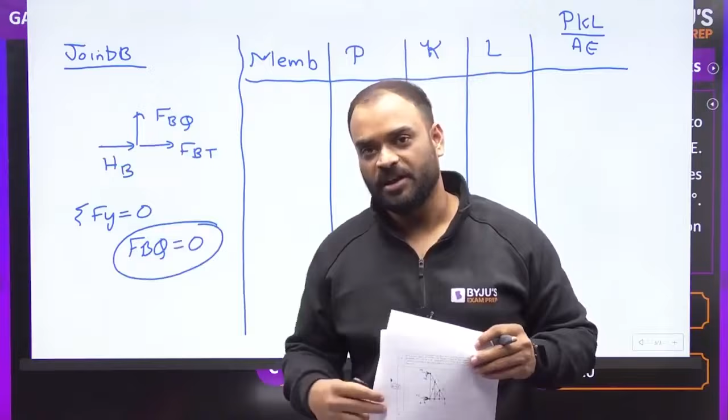That means by P force, these are the forces in the member. If we apply a unit load, then how much the forces will be there in the various members, that we have to apply. So what are the members we have? BT, BQ and TQ. Now guys, what is the force in member BT?

Let's see. In member BT, how much is the force? BT is minus P by root 3. What about BQ? BQ is 0. What about TQ? TQ is equal to 2P by root 3.

Now guys, due to P force, these are the values. If you have a unit load, then how much are the forces? Just divide all the values by P. So it will be, without changing the sign, minus 1 by root 3, 0, and plus 2 by root 3.

Now what are the lengths of various members like BT, BQ and TQ? Let's see. So the length of this particular member QT is equal to 3L.

What about BQ? BQ is equal to 3L sin 60. 3L sin 60 means 3L into root 3 by 2.

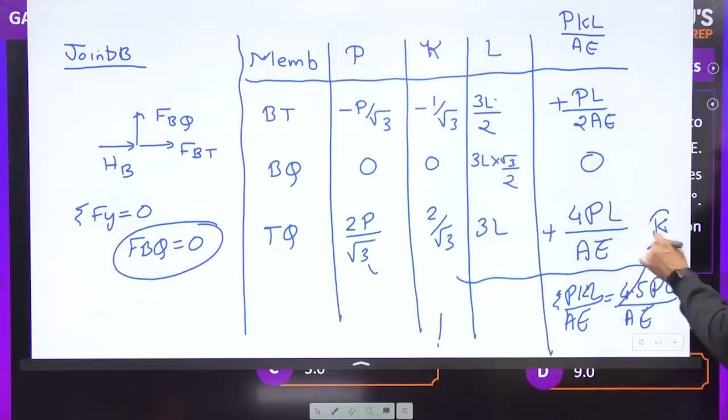So if you add both the values, how much you are getting exactly? Summation PKL upon AE is equal to how much? It is equal to 4.5 PL upon AE. So this is the value which we are getting, and this is nothing but our K value, and our answer is 4.5. Let's see if we have any option or not. So guys, B is the correct answer for this particular problem. I hope you have understood this very well, right?

Now let's move to the next question, guys. The next question is based upon the truss part again. We just need to find out the force in one of the members, and it is a very easy question. Let's do it quickly.

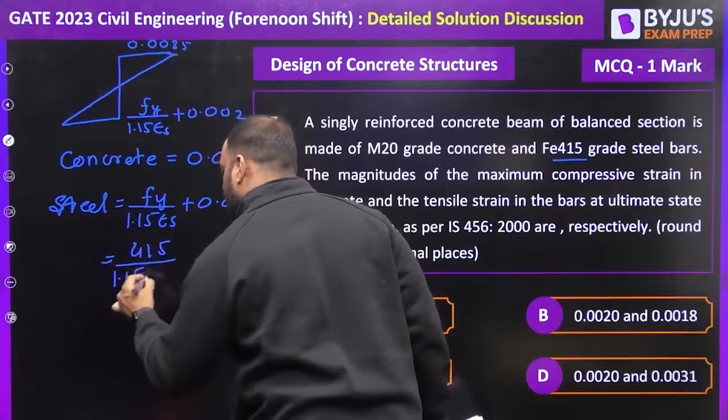So the value of Fy is equal to 415. Let's write down 415 divided by 1.15 multiplied by 2 into 10 raised to power 5, plus 0.002. If you solve this, how much are you getting exactly? Please do the calculation, I think it comes around 3.8 something - 3.80435 into 10 raised to power minus 3. So that means A is the correct answer for this particular problem. I hope it is clear to all of you.

Let's move to the next question, and it is a little bit difficult question, asked in the GATE examination. But if you have some logic or your fundamentals are very strong, then only such type of problem you can solve in the examination, otherwise it will become very difficult to solve such type of question in the exam. So what is given to us? Consider a doubly reinforced RCC beam with the option of using either FE250 as a plain bar or FE500 as a deformed bar in the compression zone. Now the modulus of elasticity of the steel is given. As per IS 456-2000, which type of bar can have the stress in the compression steel reach the design strength, which is 0.87 Fy, at the limit state of collapse.

Now, first we need to understand what is the permissible strain in case of mild steel and what is the permissible strain in case of HYSD bar, like Fe500 we have, and what should be the strain when the bar is in compression. So to understand this, we need to draw the cross section of a doubly reinforced beam. Let us consider these are the compression reinforcement and these are tension reinforcement, and let us consider this is our neutral axis. Let us consider the effective cover for compression reinforcement is DC, and let us consider this depth is XU, which is the actual depth of neutral axis.

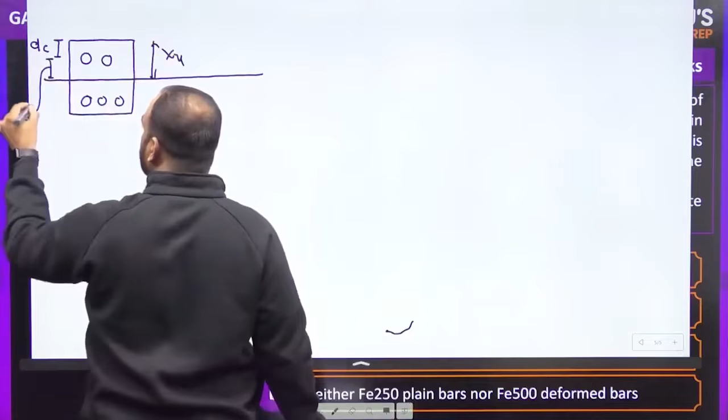So can we mark this particular distance? This distance will become XU minus DC. Now let me show you the strain diagram which we mostly use in our design or analysis. The maximum permissible strain is 0.0035, and the strain at the level of compression steel which can be achieved over here is ESC - we need to find the value of ESC. It is very easy: we can write 0.0035 multiplied by XU minus DC, divided by XU, and this is equal to the strain in the compression steel. This is the exact formula. But you know that the steel is very close to the top fiber, so for our assumption, we will consider the maximum strain achieved by the compression reinforcement is very close to 0.0035.

This is our limit, right? Maximum strain which can come in the compression reinforcement is 0.0035.

Now what we will do, guys, listen very carefully. The permissible strain for Fe250 is stress upon strain value. The permissible stress is 0.87 Fy divided by ES.

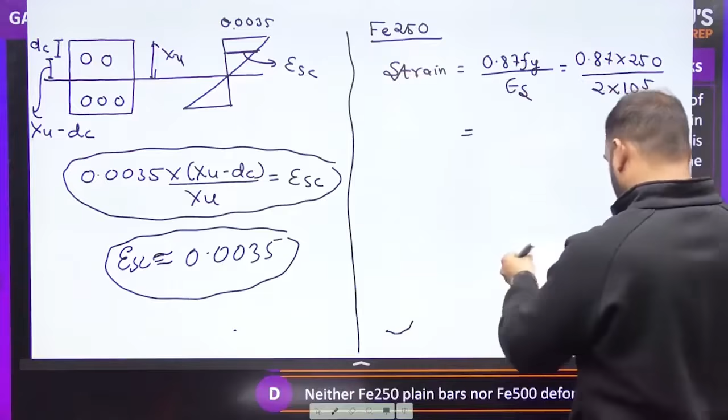So what are the values? We have 0.87 into 250 divided by 2 into 10 raised to power 5. If you calculate this, you will get the permissible strain in case of mild steel bar at which the stress will achieve 0.87 Fy. Let me write it down. This particular strain which we are getting is 1.0875 multiplied by 10 raised to power minus 3. At this particular value of strain, the stress which is basically FSC will achieve 0.87 Fy value.

But you need to think over here. This is the permissible strain for mild steel. But in compression reinforcement, the strain which is basically 0.0035 can be achieved, or it can be there in this particular reinforcement part. But you know, guys, the maximum permissible value of strain in Fe250 is 1.08 something, and this one is 3.5 into 10 raised to power minus 3.

So tell me, guys, which strain is greater? This is greater and this is smaller. So can I say that this particular strain is higher and this strain is lower? So definitely at a lower strain value, we have already achieved the failure stress, or the maximum permissible stress, which is equal to 0.87 Fy. That means Fe250 will achieve FSC equal to 0.87 Fy before achieving this particular strain value. And that's why this particular steel can fail earlier.

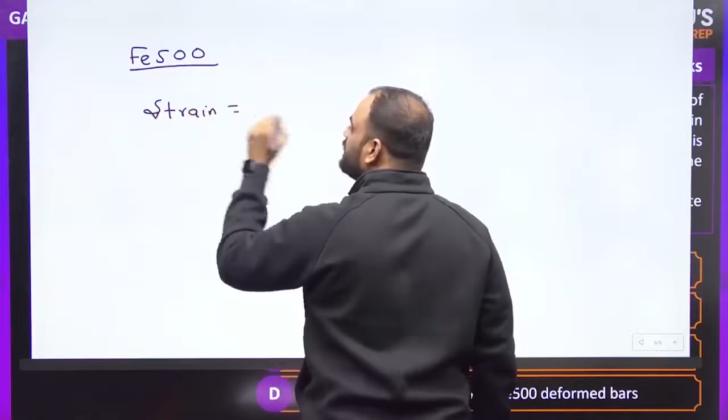But what about Fe500? Let's understand Fe500 also. For Fe500, the permissible strain is equal to 0.87 Fy divided by Es plus 0.002. So 0.87 Fy means 500 divided by Es, 2 into 10 raised to power 5, plus 0.002. If you solve this, it is coming around 4.175 multiplied by 10 raised to power minus 3. If our steel will achieve this particular strain, then only it will achieve FSC equal to 0.87 Fy.

But you know, guys, the maximum strain which can be there in the compression reinforcement is 3.5 into 10 raised to power minus 3, which is less than this particular value. So 3.5 into 10 raised to power minus 3 is lesser than the maximum permissible strain in Fe500. So that's why it will not achieve the 0.87 Fy value in case of Fe500.

Now tell me which is the correct statement. Fe250 plain bar only. Yes, Fe250 bar will achieve 0.87 Fy value at the time of failure or at the time of collapse. Fe500 no. Both no, neither no. Only the answer is A. A is the correct answer for this particular problem. Clear?

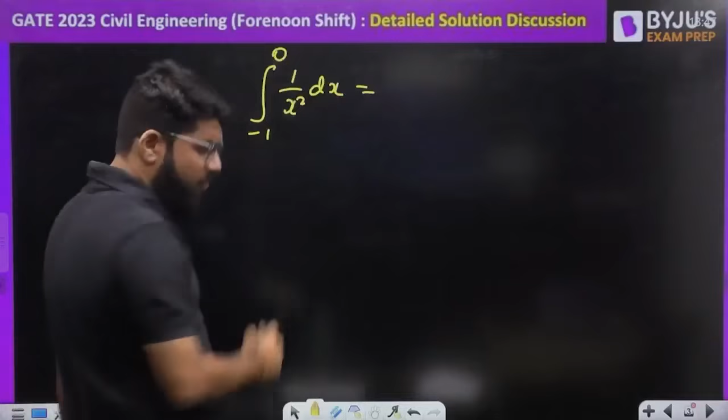So if I take any one of them, suppose I take I1, that is the integral from minus 1 to 0 of 1 upon x square dx, and the integral of 1 upon x square becomes minus 1 by x, with lower limit minus 1 and upper limit 0. Solving with the limits, 1 by 0 will be infinity, minus 1 upon minus 1, that becomes plus 1, and that is unbounded, that is divergent. It tends to infinity or minus infinity, meaning it has diverged.

And if any one of the integrals diverges, the answer will diverge. So the integral does not converge. Let me tell you, many students make a mistake here - they start directly solving the integral and get the answer as somewhere minus 2, which is wrong. So you need to take care with improper integrals - this is the improper integral of the second kind.

Moving ahead to the next question: the probability of occurrence of two independent events A and B, a very fundamental question, are 0.5 and 0.8 respectively. What is the probability of occurrence of at least one of A or B? That is known as A union B - at least one event occurring is the probability of A union B. A very fundamental question, simple even for 1 mark, because we know the formula is P(A) plus P(B) minus P(A intersection B).

Where is the intersection given? What is given is there are two independent events, and whenever there are two independent events, P(A intersection B) is P(A) times P(B). So from here you take up this data. Let me write down the answer now. P(A) is 0.5, P(B) is 0.8, and minus their multiplication, that is 0.5 into 0.8, which is 0.4. So the total answer comes out to be 0.9.

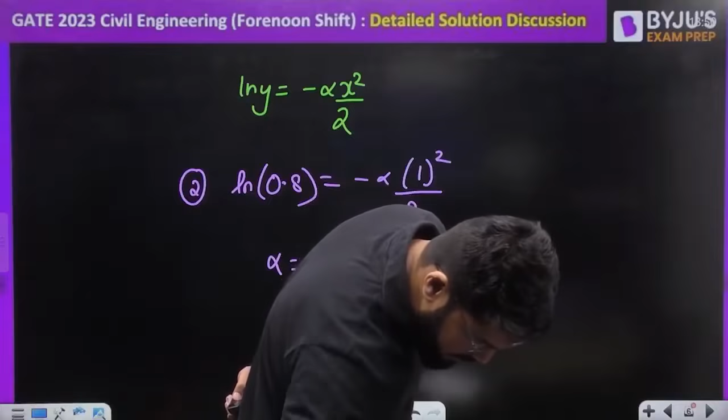Perfect, 0.446 is the answer turning up. Okay, so a very simple NAT, 1 mark question.

Moving ahead to the next question, number 42, a Fourier series MSQ question, but on very fundamentals. This is very fundamental. Looks like a big question.

The following function is defined over the interval minus L to L, that is px^4 plus qx^5. So the interval, the time period you have to take is minus L to L, and then it is expressed as the Fourier series given to you, with sine terms, cosine terms, and the constant term, also known as the DC term. Which option among the following are true?

So an depends on p, an depends on q. So actually you have to find out an and bn depend on what. Let's have a look into it.

Now when I want to solve for an, look, this is sine pi by L x. That means omega is pi by L, or I can say that time period is 2L. Time period is 2 pi by omega, and that you can judge from here as well. The function is defined for the given interval minus L to L.

Now, an is the coefficient of sines. An is equal to what? Coefficient of sine. And what is the formula? The formula is 2 upon T integral over one time period of f(x) sine n omega x dx. Clear? That should be the formula.

So now let us substitute. This an is then equal to 2 upon 2L integral for one time period, taking minus L to L as one time period. f(x) is px^4 plus qx^5 multiplied by sine n omega x, and omega is pi by L, so sine n pi x by L, dx.

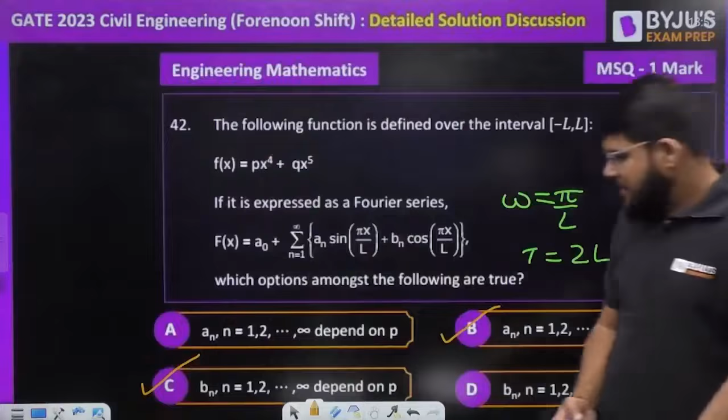So this integral will be zero, and Bn is going to be left depending on P. Bn will depend on P. So that's option number B and option number C. The correct answer is option number B as well as option number C.

Moving ahead to the next question, number 43. If M is an arbitrary real n cross n matrix, then which of the following matrices will have non-negative eigenvalues? Let us have a clear discussion on this, because questions based on the combination of matrices are very important every year.

Now how do you actually find the eigenvalues of, say, M square or M transpose, etc.? Let's do a small discussion. Suppose M has the eigenvalue lambda and eigenvector x. So we say Mx equal to lambda x. We say x is an eigenvector if it satisfies Mx equal to lambda x. Now what about M square?

What about M square? I multiply M on both sides. So M into Mx becomes M into lambda x. This is known as M square x, and lambda is a scalar number you can take outside, leaving Mx. But Mx is lambda x. So M square x is known as lambda square x. So what are the eigenvalues of M square?

So if M has the eigenvalue lambda, M square has the eigenvalue lambda square. Now M is a real matrix, but its eigenvalue lambda square may be positive or negative, because lambda may be imaginary as well. Looking at lambda square, it seems it may be positive only, but it may actually be positive or negative. For example, if lambda is plus or minus i, then lambda square will be minus 1, so it can be negative too. So will it always have non-negative eigenvalues? We directly can't say that.

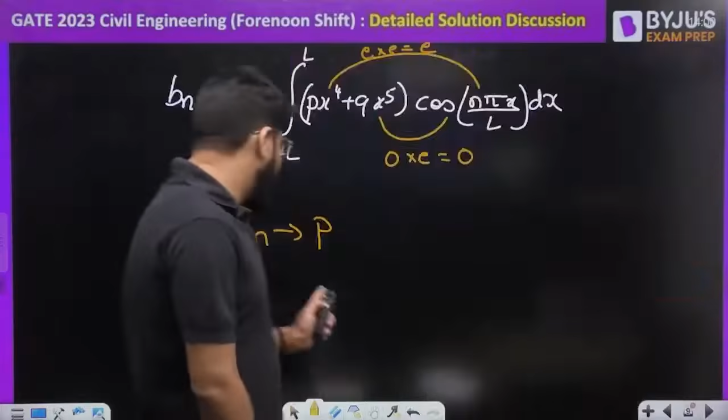So M transpose will have eigenvalue lambda, but M transpose squared will have lambda square, which may be positive or negative. So for option A or D, we can't surely comment, meaning it is not the answer.

Which of the following will always have non-negative eigenvalue? M M transpose and M transpose M. M transpose M is always symmetric.

Number one method, you can solve this using the concept of definite matrix, semi-definite matrix. Or there's one more way of solving this question. If I want to talk about option B or C, let's talk about M transpose. Let M be equal to, I'll give you a very simple solution.

Let M equal A, B, C, D. So what is the product M transpose M? It becomes A, B, C, D multiplied by the transpose of A, B, C, D. When you take the product, it becomes A square plus B square; then first row second column, AC plus BD; then again AC plus BD; and lastly C square plus D square. That is M transpose M.

Now what are the eigenvalues of M transpose M? If I calculate the trace, the sum of eigenvalues lambda 1 plus lambda 2 equals the trace, which is A square plus B square plus C square plus D square, sum of squares, always positive. Then the product of eigenvalues equals the determinant, and when you solve for the determinant, it is A square plus B square multiplied by C square plus D square, minus the cross term AC plus BD whole square.

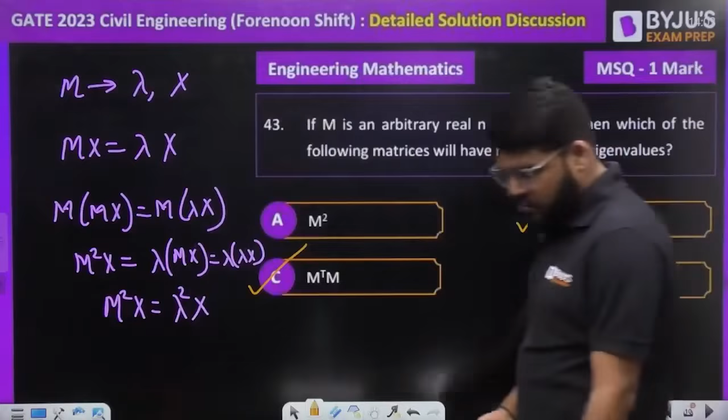Now see, eigenvalues of A transpose are the same as the eigenvalues of A, as I just proved. But are the eigenvectors the same? No, we've also proven that eigenvectors of A transpose will not be the same as the eigenvectors of A. Then for eigenvalues of A inverse and eigenvectors like M square, let's prove this too. So, AX equals lambda X, right? Multiply both sides by A inverse.

A inverse into A got cancelled, so X is equal to lambda, A inverse into X. Lambda to be divided on other side. So what is A inverse X? It is 1 by lambda X. Now in AX equal to lambda X, X is the eigenvector, lambda is the eigenvalue. Similarly, A inverse X is 1 by lambda X.

So eigenvector remains to be X, but eigenvalue is 1 by lambda. That means if A has the eigenvalue lambda and X, A inverse has the eigenvalue 1 by lambda, but with the same eigenvector. That means the eigenvalues of A inverse are the reciprocals of eigenvalues of A, and option D, eigenvectors of A inverse are same as eigenvectors of A. Correct. The correct answer for this MSQ question is A, B, D.

See, this matrix is just given as a dummy matrix. You might think that first I should calculate A inverse and A transpose, but I'll be wasting a lot of time. No, don't have to waste so much time here. Moving ahead to the next question.

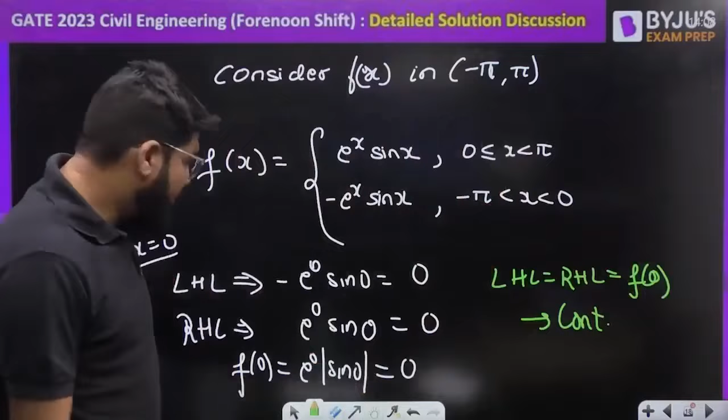Now, what is the left hand derivative? I am checking at x equal to 0. Left hand derivative means when x is slightly less than 0: minus e power 0 cos 0 minus e power 0 sin 0, and since cos 0 is 1 and sin 0 is 0, this equals minus 1. Now the right hand derivative for x greater than 0: e power 0 cos 0 plus e power 0 sin 0, which equals plus 1. Since left hand derivative does not equal right hand derivative, the function cannot be differentiable.

As I taught earlier, at any point if a function is continuous but the left hand derivative is not equal to the right hand derivative, then such a function is said to have a sharp point, a break point, or a corner point at that value of x.

So moving ahead to the next question, number 46: a function fx that is smooth and convex shaped, one of the very simple questions for 2 marks.

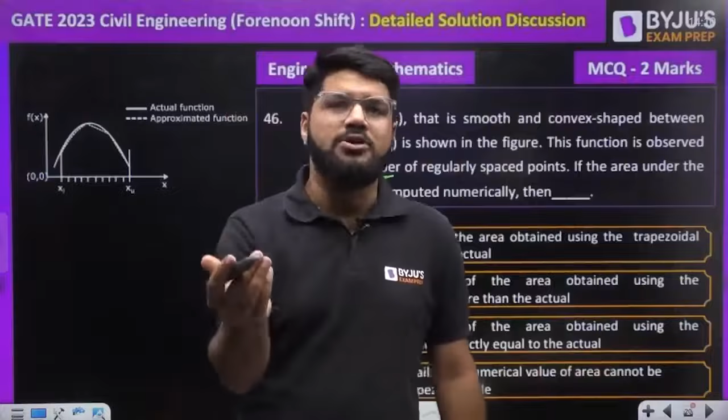So for odd number of points, what do we do? Let me take this smooth and convex shape and mark 3 points: point number 1, point number 2, point number 3. This is my XL lower limit, this is my XU, and this is my middle point XM.

Even if you take any odd number of points, the logical question is how do you find the numerical area? By the trapezoidal rule - by joining every end point and creating a trapezoid. This is one trapezoid, this is the next trapezoid. So the total area by the trapezoidal rule is the sum of all the areas of the trapezoids obtained, and from the area of trapezoid formula only, you get the final formula of the trapezoidal rule.

Graphically it is clear that this area is slightly less than the actual area - this part has gone missing. That is why the total area will be less than the actual area. The correct answer is A - nothing more to derive here. It's a simple observation: because it's a convex shaped graph, the total area computed is less. The correct answer is A.

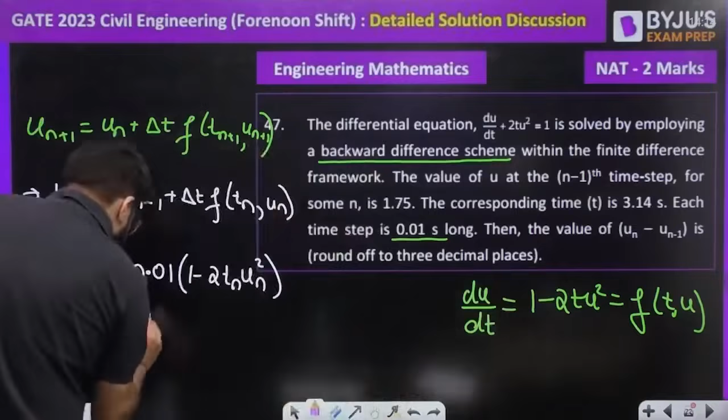Now you are given un-1 and tn-1. Let me write the value separately: un-1 is equal to 1.75. At what time? At tn-1, the corresponding time is 3.14.

So what is going to be the next time tn? That is 3.14 plus the step size, 0.01, so the value of the time is 3.15 seconds. At that time, I will calculate un, and then I have to find un minus un-1.

We cannot directly extract this from here, because un will still be a variable. So let us first find un.

So what is this un? That is un-1, which is 1.75, plus 0.01 into 1 minus 2tn times un squared, where tn is 3.15. tn is 3.15 and un is the unknown we need to figure out.

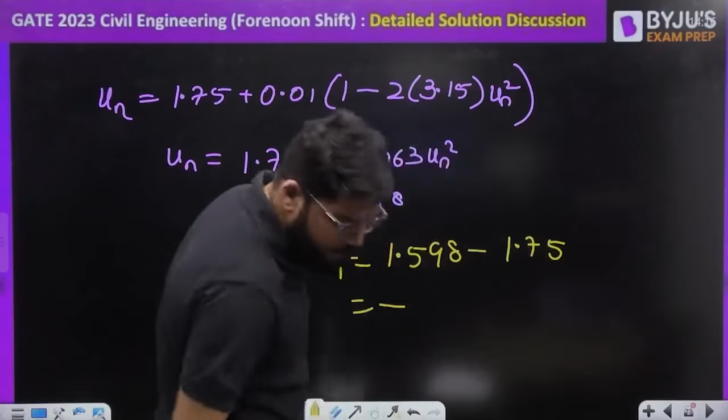Right, now let us calculate un minus un-1. That is 1.598 minus 1.75, which is going to be something negative. Quickly subtracting: 1.598 minus 1.75, and the answer is minus 0.152. That is the answer.

All right, moving ahead to the next question. So the previous one was the last question of mathematics. Now we have the questions of aptitude and verbal, I'll just tell you the answer key. Let us discuss the quant and logical reasoning question: I have not decided what I will do this evening, I might visit a friend.

Next, 49: Eject is to insert as advance is to retreat. By word meanings, you have to solve this. Next, let us come to this question.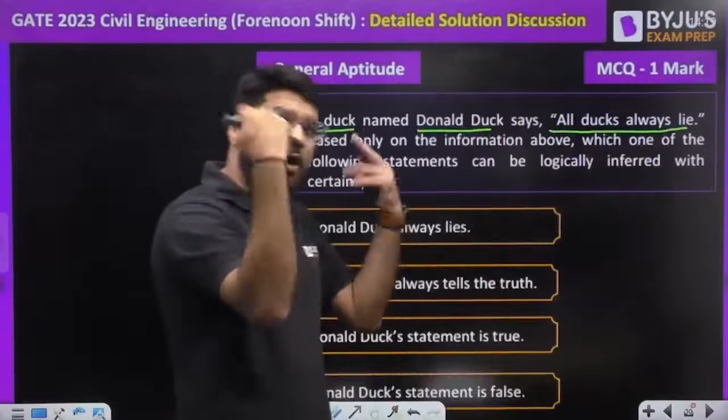Next question, a very simple logical reasoning, interesting question. A duck named Donald Duck says, all ducks always lie. Now, based on this information, this is a question known as a paradox. Which of the following statements can be logically inferred with certainty, the one that is 100% true? Option: Donald Duck always lies. Listen, I'll explain you word by word. Donald Duck is a duck, and that is why it should always lie. But who gave this statement? All ducks always lie, and Donald Duck is also a duck, so it looks like Donald Duck always lies.

But this statement has also been given by a duck. So is this statement correct? If this statement is correct, what is the contradiction? If this statement is correct, then according to this statement, all ducks will lie, so Donald Duck will also lie. So this statement cannot be correct, hence we cannot conclude this.

Next option: Donald Duck always tells the truth. If Donald Duck is telling the truth, then this statement should be correct. But this statement says all ducks always lie, and this is also a duck, so then Donald Duck cannot say the truth. So the second option also is not correct and cannot be concluded.

Next option: Donald Duck's statement is true. No, even if the statement is true, then all ducks must lie, and Donald Duck is a duck, so his statement will always be false. So this is also wrong.

Only option left is D: Donald Duck's statement is false. Yes, its statement itself is false, because if the statement were true, then all ducks cannot lie. Since Donald Duck is a duck, his statement cannot possibly be true. So Donald Duck's statement is false. The only best possible option is D.

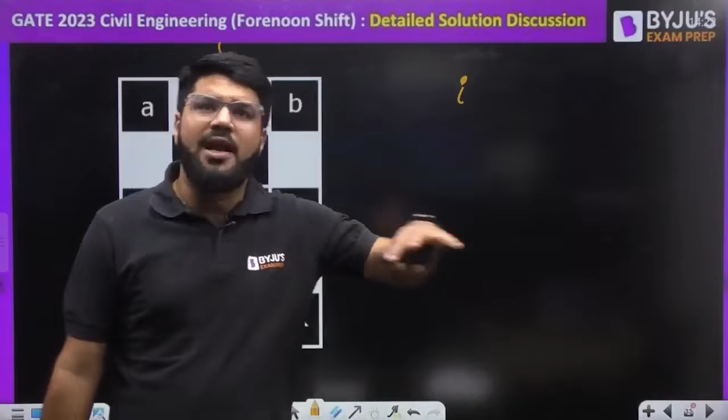Now, since I is covered, the next line of symmetry will be horizontal. I told you that diagonally we cannot split here because it is not a perfect square case, it's a rectangle case. Now let's take the horizontal line of symmetry.

According to the horizontal line of symmetry, this column is symmetrical. Now this is not symmetrical because this is colored now. So let's color this in actually. Let us place this color. Okay, let me color this.

Since this entry is colored, C also has to be colored for this column to be symmetric. So the next entry is C, and now I've made C colored too. Moving ahead, again C and D both have to be colored because these two are colored, so D has to be colored too. The last row is uncolored, colored, uncolored, colored, which is anyway symmetric. So the answer includes I, C, and D — that is option B.

So C, D, I. This is a very observation-based one-mark question. I'm explaining this much for your understanding, but otherwise it's clear just from observation. Okay, let's move to the next question.

Based on the truth of the statement, some humans are intelligent — not all, but some humans are intelligent. Let's say these are humans, and some of them, not all, are intelligent. So it would be a contradiction to say no human is intelligent. If some A are B, then some B are A — that's what we've learned in syllogism. So some intelligent beings will be human, which is option D. We won't discuss much since this is a very basic syllogism statement.

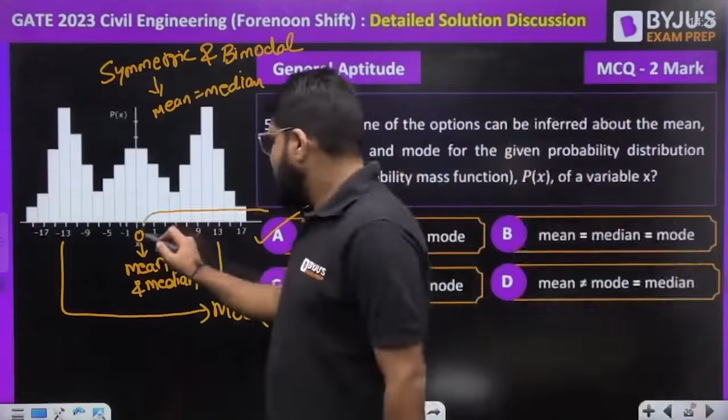The sum of probabilities on this side and on that side will be equal, and because of symmetry, when you take the average, it turns out to be the centermost point. For example, if values are 1, 5, 9, 7 on one side and minus 1, minus 5, minus 9 on the other, just for explanation, they'll all cancel and mean will be 0. Actually you add with the respective probabilities, not directly, but since probability is symmetric, the common probability factors out and terms like 1 plus minus 1 give 0, 5 plus minus 5 give 0, so ultimately the mean is 0. No need to derive this — you must just know that for a symmetric distribution, mean and median are equal.

For a symmetric and unimodal distribution, the mode will also be equal.

Okay, moving ahead to the next question. This is a verbal ability passage-based question. I'll just give you the answer for this: the correct answer is option D.

Next question: let A equal 30 factorial, B equal 50 factorial, C equal 100 factorial. Very simple question for 2 marks. Consider the following numbers, and let me write them as W, X, Y, Z. W is log C to the base A, that is log C upon log A. Eventually we have to compare all. So what is the value of C?

C is 100 factorial, divided by log A, that is log 30 factorial. Then X: log A to the base C, that is log A upon log C, that is log 30 factorial divided by log 100 factorial.

Y is log A to the base B, that is log A divided by log B: log 30 factorial divided by log 50 factorial. Z is log B to the base A, that is log B upon log A: log of 50 factorial divided by log of A, that is 30 factorial.

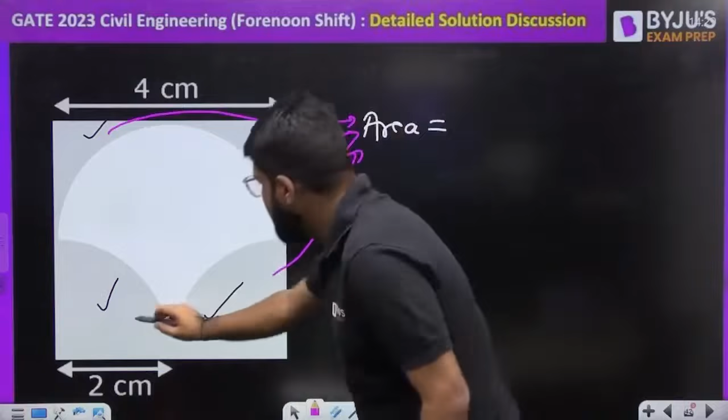This is the shaded region - this portion, this portion, this portion, and this portion. So what is the total area of the shaded region? How much is it?

Guys, first the top area: this is 4, so this becomes 2. Take the area of the rectangle directly - base into height, 4 into 2. Area of rectangle, out of which subtract the area of the semicircle, minus pi r square by 2.

That is the top area plus bottom area. The bottom has 2 quadrants; the area of one quadrant is pi r square by 4, half of the area, and similarly the other one, so that becomes twice. So half minus half gets cancelled, no need for the radius. The answer is just equal to 8.

Very simple. So this time, this particular aptitude set is very simple, even the 2-markers are just like a bonus.

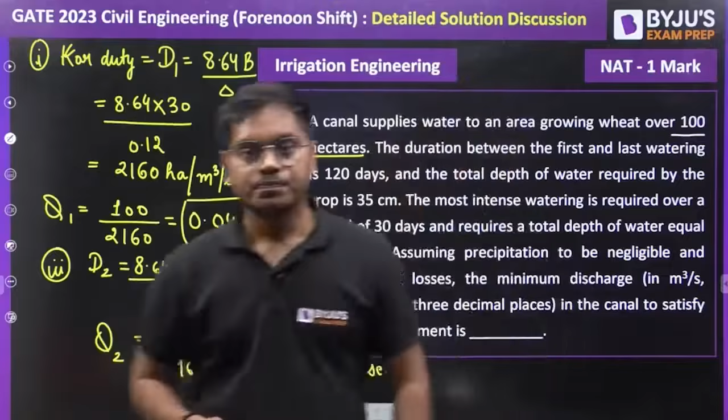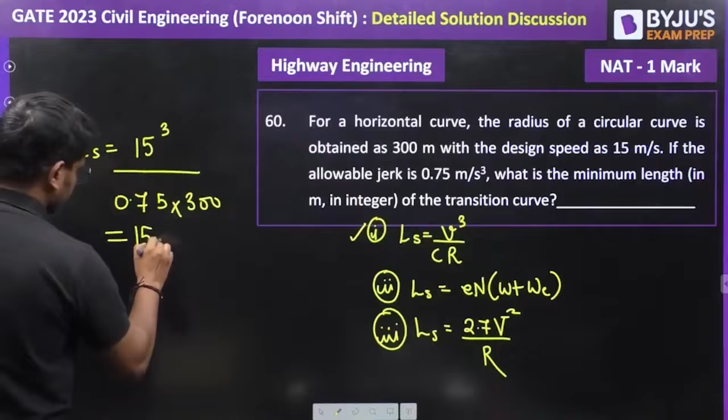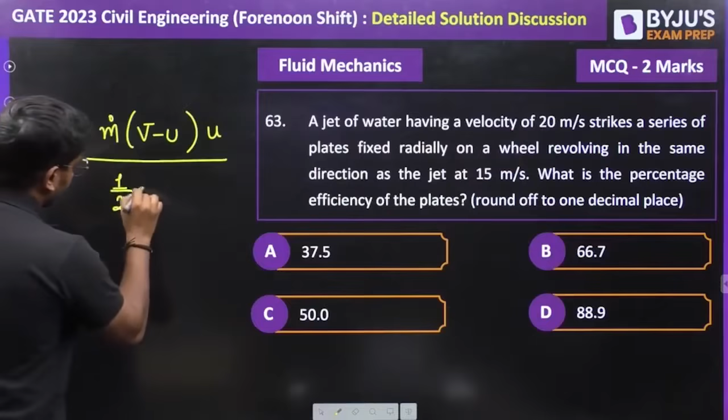Here again m to m gets cancelled out, and we are left with 20 minus 15 into 15, divided by half into 20 square. When you solve this, the answer you get is 0.375.

That is 37.5%. So these are the questions that we had for this forenoon session. I hope you were able to understand all the solutions we discussed today for all the subjects. Thank you so much.

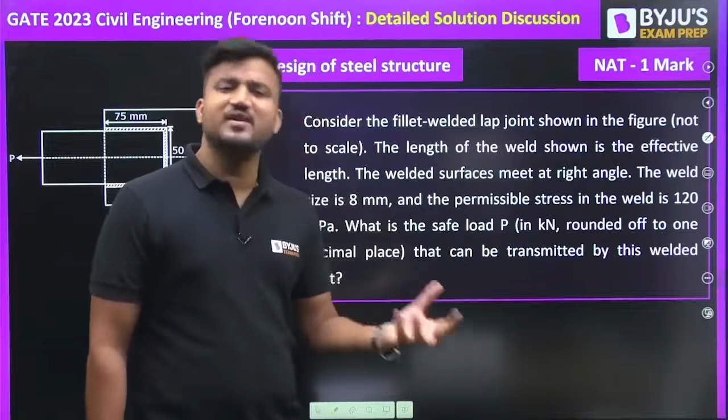The welded surfaces meet at right angles, meaning the surfaces meet each other at 90 degrees. The weld size is 8 mm and the permissible stress in the weld is 120 megapascal. What is the safe load P in kilonewton, rounded off to 1 decimal place, that can be transmitted by the welded joint? Simple question: if I make a lap joint with fillet welding, how much load can it safely carry, called P, and the answer should be in kilonewton up to one decimal place.

If I have this kind of lap joint, then in that case the safe load it can carry equals the permissible stress multiplied by effective area, the area which effectively helps carry this load P. We need to find this safe load P.

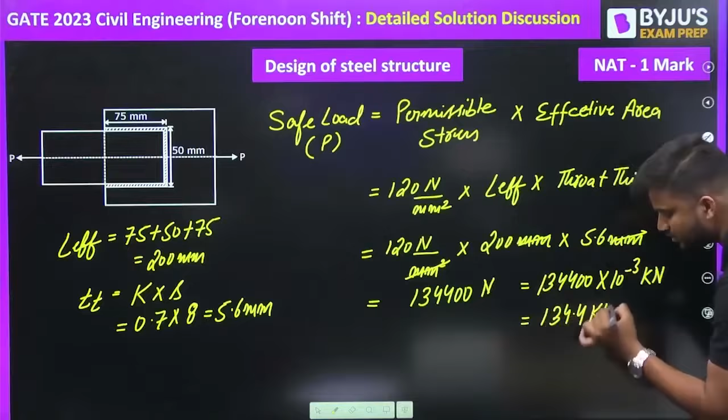लेकिन उन्होंने question kilonewton में पूछा है, तो answer kilonewton में देना है। इस value को 10 to the power minus 3 से multiply करने पर यह 134.4 kilonewton आता है। यानी यह फिलेट वेल्ड जॉइंट जो P load को carry कर रहा है, वो सेफली carry कर सकता है P value 134.4 kilonewton।

ठीक है, तो वेल्ड के क्वेश्चंस बहुत important हैं अगर future GATE examination 2024 और 2025 की बात करें, weld questions must हैं। और इसके अंदर एक दूसरा सवाल पूछा गया है, वो भी बहुत important है, चलिए उसे भी solve करने की कोशिश करते हैं।

यहां एक section दिया गया है, और यह एक symmetrical section है, क्योंकि इस dimension के along भी B और B value ही दी गई है। अगर इसको y axis के along cut करें तो भी 2 equal half में divide हो जाएगा, और अगर x axis के along center से cut करें तो भी equally divide हो जाएगा। यानी दोनों axis के along सेम निकल के आता है, यह symmetrical section है।

अब कहा गया कि horizontal axis passing through the centroid of the steel beam consider करो, यानी horizontal axis steel beam के center से निकल रही है, as shown in the figure। What is the shape factor rounded off to 1 decimal? यानी value अगर decimal में आती है तो 1 decimal तक बताना है for the cross section।

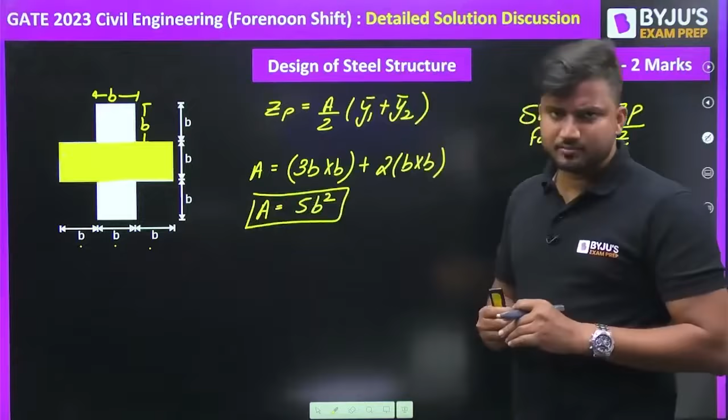तो मुझे एक बात ये पता है कि मैं y1 बार कैसे निकालता हूं, फ्रॉम द सेंट्रोइडल एक्सिस। मैं ये चेक कर रहा हूं कि इस सेक्शन का y1 बार कहीं यहां पे लाई कर रहा होगा। बट मुझे एक चीज ये नजर आ रही है कि ये y1 बार जो है और जो y2 बार है ये कहीं यहां पे होगा।

और ये एक सिमेट्रिकल सेक्शन है, इसीलिए y1 बार विल बी इक्वल टू y2 बार, क्योंकि सेक्शन सिमेट्रिकल है। तो अगर मैं सिर्फ y1 बार कैलकुलेट कर लूं, y2 बार मुझे ऐसे भी मिल जाएगा, क्योंकि y1 बार के बराबर ही होगा। तो चलिए लेट्स स्टार्ट विद y1 बार।

मैंने कहा कि भाई इतना सेक्शन मेरे लिए पहले इंपॉर्टेंट है, दिस सेक्शन इज इंपॉर्टेंट फॉर मी, एंड मैंने इस सेक्शन को कट करके अलग से निकाल लिया। इस सेक्शन में मैंने देखा कि अगर देखें तो ये ऊपर वाली डायमेंशन b है, नीचे वाली फुल डायमेंशन 3b हो जाएगी।

ठीक है, ये मुझे पता है पूरा b था, तो इसका आधा कितना हो जाएगा, b/2 हो जाएगा। ऊपर वाला बचा हुआ तो अगेन b से एज इट इज है ही। अब मेरे लिए y1 बार लोकेट करने के लिए मैं यहां से कितना जा सकता हूं, किसी इस लोकेशन पर जा सकता हूं, यहां पे कहीं मुझे y1 बार मिलेगा। बट फॉर दैट व्हाट आई नीड इज y1 बार की वैल्यू क्या होती है।

y1 बार इज नथिंग बट a1 y1 प्लस a2 y2 अपॉन a1 प्लस a2। अब ऐसा क्यों कह रहे हैं हम, क्योंकि हमें पता है कि ये सेक्शन को भी अगर मैं ध्यान से देखूं, इट कैन बी डिवाइडेड इनटू टू पार्ट्स, एक ये रेक्टेंगुलर पार्ट और एक नीचे वाला ये रेक्टेंगुलर पार्ट।

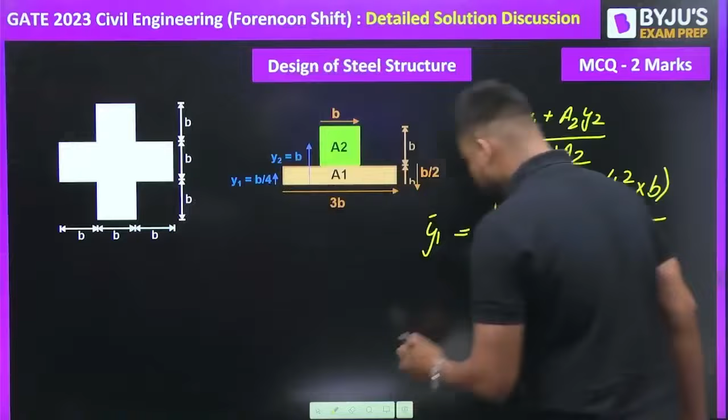Okay, so y1 bar we can calculate, and this value let's calculate it here only. So y1 bar is coming 3b square, 3b cube by 8 plus b cube, whole upon 3b square by 2 plus b square.

This can be written as, LCM ले लेंगे तो 11b cube by 8, and simplifying it ये लिखा जा सकता है 2 upon 5b square, and this can be written after simplifying as 11b by 20. So y1 bar and y2 bar is nothing but equal to y1 bar.

And we needed to calculate ZP, that is nothing but a/2 (y1 bar plus y2 bar), which can be written as a1, where our a came out to be 5b square, divided by 2. y1 bar is 11b by 20, y2 bar is nothing but equal to y1 bar, so that's 11b by 20. And this can finally be written as, if you simplify, 2.75 b cube. So you've calculated nothing but ZP.